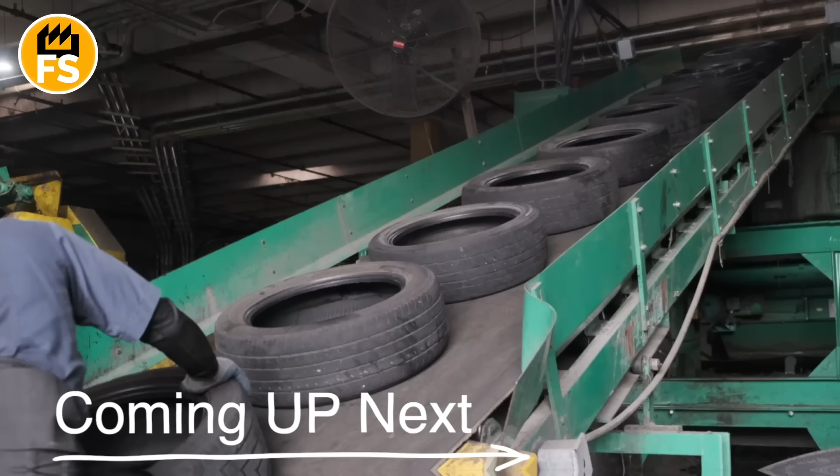Houston, Texas, high noon. The sun here doesn't just shine, it presses down on your shoulders like a heavy, hot blanket. The air above the scorching asphalt shimmers with heat waves, and your lungs fill with a thick, distinct smell, a mix of heated rubber, dry prairie, and diesel fuel.

I'm standing at the gates of the Genan plant, the world's largest tire recycling facility, and I can feel the soles of my boots starting to soften on the blistering Texas ground. Today, I'm not just a tourist. I'm a witness to a massive technological alchemical process, where what the world considers waste that won't decompose gets transformed into energy, and the very foundation of the highways we drive on.

Houston didn't just greet me with sunshine. It slammed me with a wall of sticky heat that folks down here in Texas call the devil's breath. But the second I stepped through the entrance to Genan's facility, the sounds of the city, distant highway hum and rustling wind, instantly shifted into something far harsher.

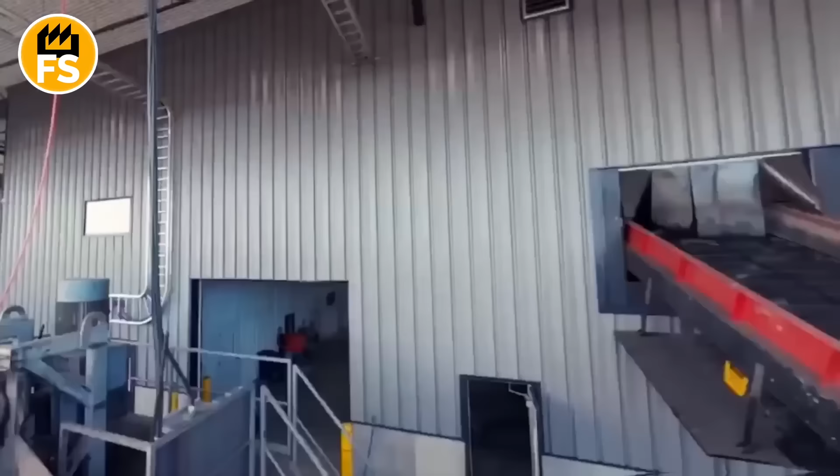Industrial chaos. But chaos that's perfectly ordered, rhythmic, almost primal. The first thing that hits you isn't the sound, it's the vibration. You don't just hear it, it rattles your chest like a low bass line at a rock concert. That's the giant motors firing up the heart of the plant.

And spread out before me are the real black Himalayas. Thousands, maybe tens of thousands of used tires stacked into neat but staggering mountains. Everything's here. Thin wheels from compacts that only ever touched smooth asphalt, all the way up to massive donuts from mining dump trucks, treads tall as a person. They all came here to die, so they could be born again.

The smell here is something else. It's not just the stench of rubber. It's a complex cocktail of heated polymer, traces of road tar baked into the treads, and hot metal. The Texas sun mercilessly scorches these black surfaces, and the heat radiating off them makes you feel like you're standing next to an open oven.

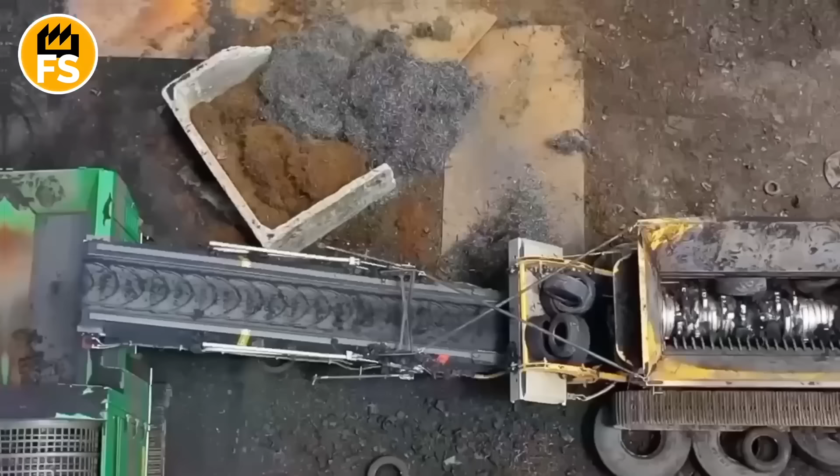The air between the mountains has solidified. It's thick and oily. I watch as another truck rolls up. The hydraulics groan as the bed lifts, and hundreds of tires tumble down with a muffled rumble. Thump, thump, thump, cascading to the foot of the black mountain.

This sound of rubber hitting rubber layers over that same endless vibration from the plant's engines. It creates this uncanny sensation of being inside a living organism. The plant breathes with this rhythm. It's hungry, and these mountains are its food.

The vibration intensifies when the feed conveyors kick on. You see these massive manipulators, like the claws of prehistoric monsters, tearing into the piles, snatching their prey. In this place, on the edge between old junk and raw material, you feel tiny.

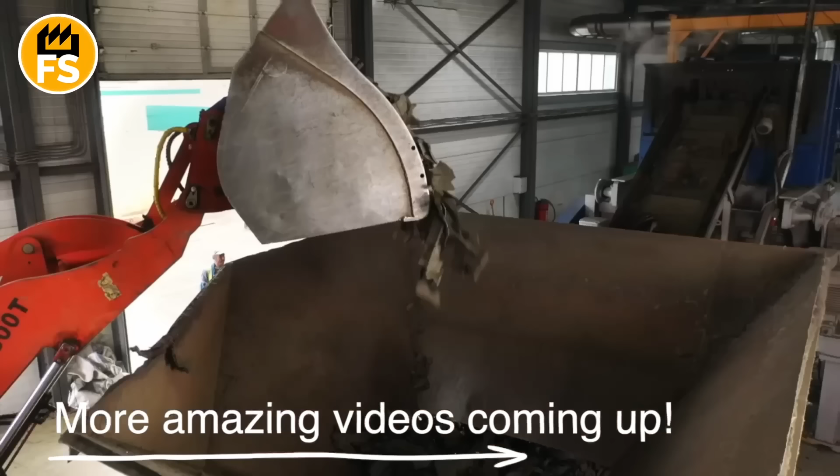We're following the conveyor belt that leads straight into the heart of the main floor. Here, that vibration I mentioned earlier transforms into physical force, pounding against your eardrums. We approach it, the primary shredder. If those mountains of tires were a graveyard, then this machine is the industrial meat grinder that knows no mercy.

The first thing that hits you is the contrast between speed and power. You'd expect the shredder to spin at breakneck speed, flinging chunks of rubber in every direction like a blender. But no, the shredder's shafts move slowly, almost lazily. But within that slowness lies colossal torque, force capable of crushing stone.

It's a deliberately engineered method. Low rotational speed prevents the rubber from overheating, keeping it from melting and sticking to the blades, which would turn the machine into a gummy trap.

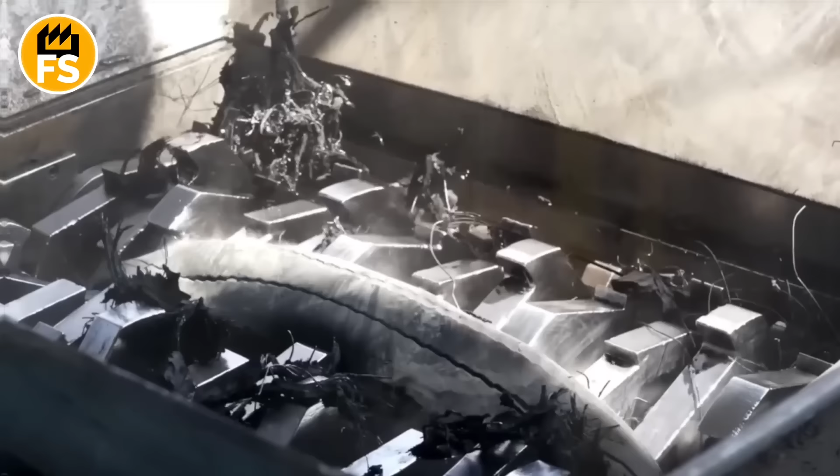When the next tire, say, a massive wheel from a Texas pickup, hits the rollers, something happens that makes you flinch. The tire tries to hold its shape. Its steel belt, that same skeleton that carried tons of weight on the road, puts up one last fight. But hardened blades made from special alloy dig into the tread like the teeth of a prehistoric predator.

One second, and you hear that distinctive crunch as the steel wires inside the rubber snap under hundreds of tons of pressure. In that moment, bright, angry showers of sparks fly out of the shredder's jaws. It's the friction of the steel belt against the blades, creating miniature lightning bolts inside the machine's dark belly.

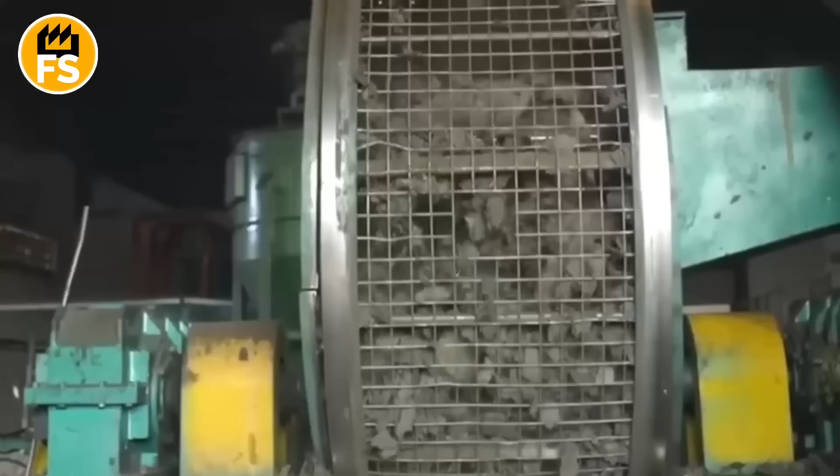The heat here becomes almost unbearable. If it was just hot outside in Houston, near the shredder, the air heats up to a temperature where the sweat on your forehead instantly turns sticky with rubber dust. You can smell the frictional heat, sharp, metallic, with notes of burnt sulfur. It's the smell of matter being physically destroyed.

Dust is everywhere here. It's not just floating in the air, it's dancing in the beams of industrial lights, settling on every surface like black velvet. These are tiny rubber particles released during the tearing process. You can see chunks falling from beneath the rollers onto the exit conveyor.

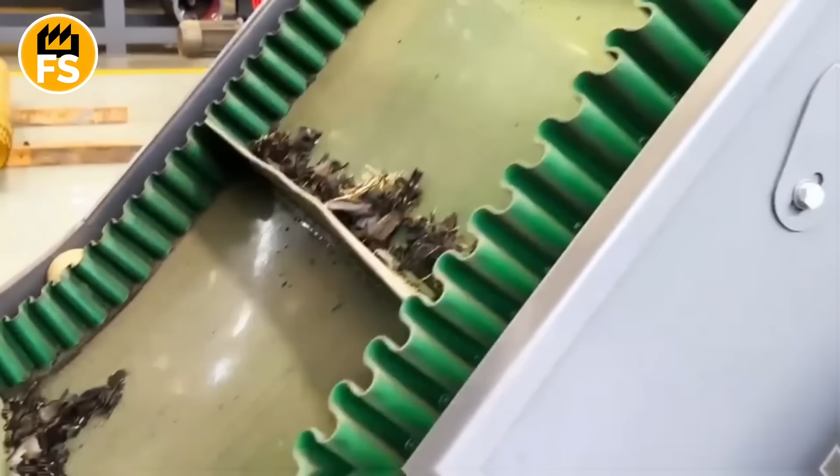This isn't a tire anymore. These are shapeless, torn scraps of rubber, roughly the size of an adult man's palm. Mangled strands of steel wire stick out from them, those same cord fangs that magnets will pull out in the next stage. The chunks of shredded rubber that just passed through the shredder's jaws move along on the conveyor belt. They look terrible, torn, dirty, hot, with those same mangled steel wire threads, cord fangs, sticking out from every black edge. Right now, one of the most cinematic stages at the Genan plant begins.

We're approaching the magnetic separation zone. Above the conveyor, where chunks of tires race by in an endless stream, massive blocks hang suspended, overhead electromagnetic separators. They hang low, almost touching the black flow, humming with voltage. What happens on the belt resembles an uprising of the dead.

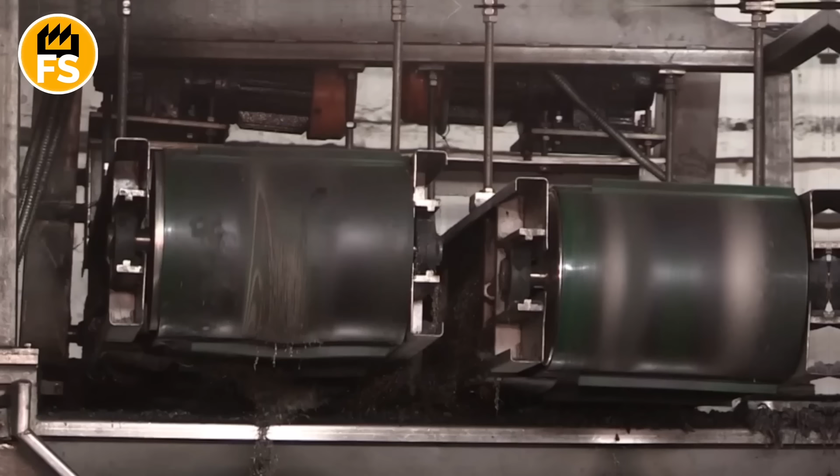When a ragged chunk of rubber enters the magnet's zone, the steel threads inside it react instantly. You see it with your own eyes. Metal wire that a second ago was part of a solid framework suddenly comes alive. With savage force, it tears free from its rubber prison, dragging the entire chunk with it, or simply slipping out like a knife through butter.

Metal literally shoots upward, defying gravity. It looks like strange, aggressive magic. Thousands of steel needles and twisted wires slam into the magnetic belt with a loud crash, spinning perpendicular to the main conveyor. This is that endless clacking, the sound of thousands of metal fragments hammering into the separator's steel armor.

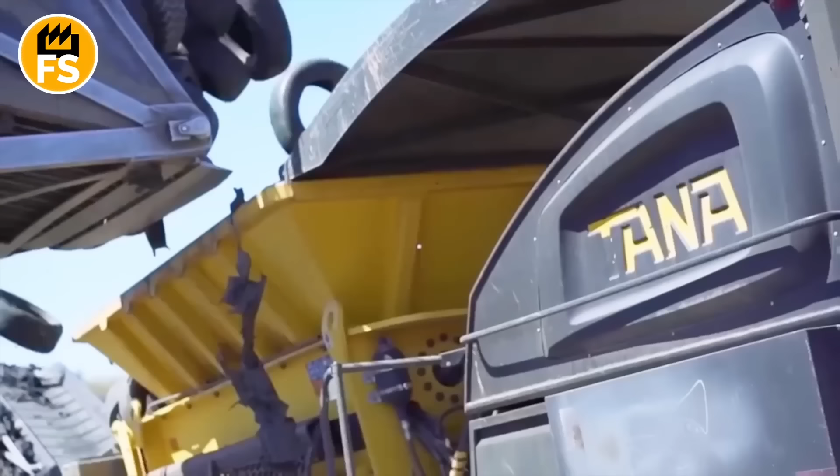The heat in this zone is unique. The magnets consume a massive amount of electricity and generate heat themselves, mixing with the warmth from freshly cut rubber. You're standing in a cloud of a specific smell, a blend of ozone, which always accompanies powerful electromagnets, and warm, raw metal. It's the smell of a forge, but without fire.

Look to the left of the main conveyor. Another mountain is growing there, a mountain of pure steel. The magnetic belt carries the captured metal beyond the rubber stream, and where the magnetic field vanishes, dumps it into a separate hopper. You're looking at springs coiled into spirals, long sharp needles, tiny metal chips. Everything gleams under the factory lights with a cold, bluish glow, contrasting sharply against the matte black of the rubber.

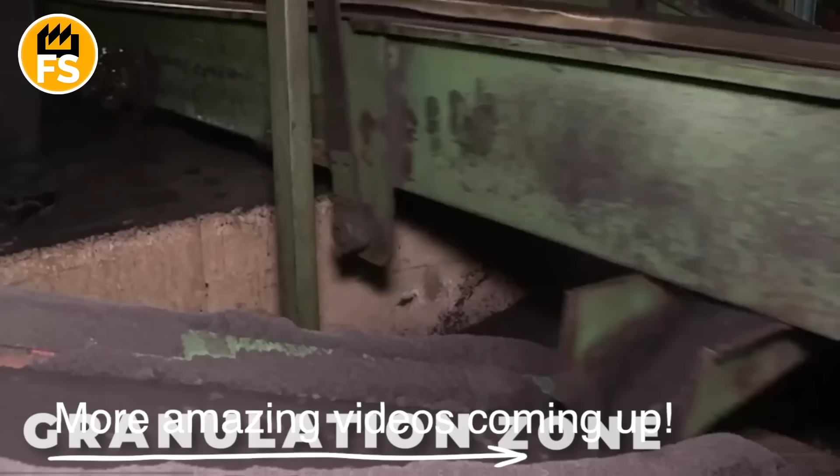Stripped of its steel skeleton, the rubber moves forward into the darkest and most airtight section of the plant. Now that the metal's gone, the rubber chunks look surprisingly light, but that's just an illusion before the final battle. We're entering the secondary granulation zone. High-speed granulators transform the torn pieces into perfect rubber crumb.

The air here is thick with black snow, fine dust swirling through beams of light. Each granule passes through a system of vibrating screens, where they're sorted by size down to a fraction of an inch. But the real climax lies ahead, inside the sealed steel pyrolysis reactors.

We approach the long, insulation-wrapped cylinders. This is the zone of quiet energy. There's no open flame here, but inside, hellish heat reigns, 850 degrees Fahrenheit. The key secret? Total absence of oxygen. The rubber doesn't burn, it distills.

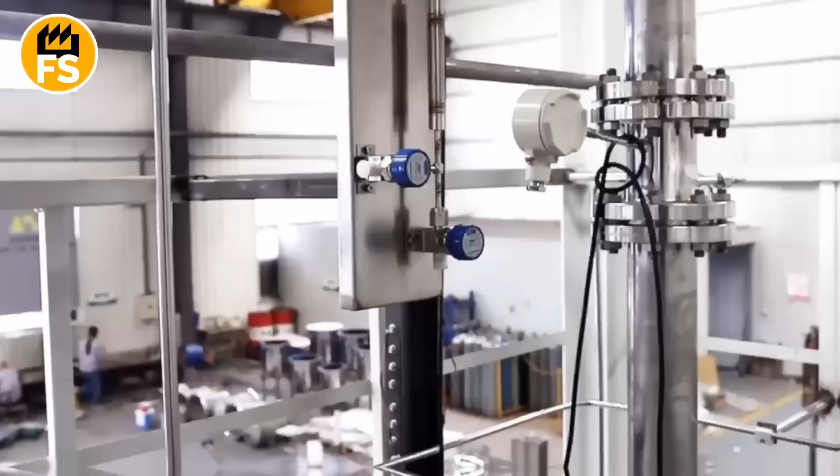There's a metal so rare that humanity mines less of it in an entire year than gold in a single day. A metal that costs $2,000 to $4,000 per pound. A metal you've never heard of, but one that's keeping the plane you flew on for vacation from falling out of the sky right now. This is rhenium, the rarest stable element in Earth's crust, a silvery white metal that doesn't exist as its own ore and is only extracted as a byproduct. Without it, we wouldn't have modern jet engines, and aviation would be stuck at mid-last century levels. Let's dive into the world of the planet's most exclusive mineral, where every gram is worth its weight in gold, and applications are measured not in tons, but in pounds.

Let's start with the scale of rarity. Rhenium makes up about 7 ten-thousandths of a part per million in Earth's crust. For comparison, gold is 4 thousandths, platinum is 5 thousandths. But gold and platinum can be found as nuggets or concentrated ores. Rhenium never happens that way. It's scattered as microscopic impurities in other ores, mostly molybdenum and copper. The concentration is so low that even talking about rhenium ore isn't really accurate. It's always ore of something else that just happens to contain rhenium.

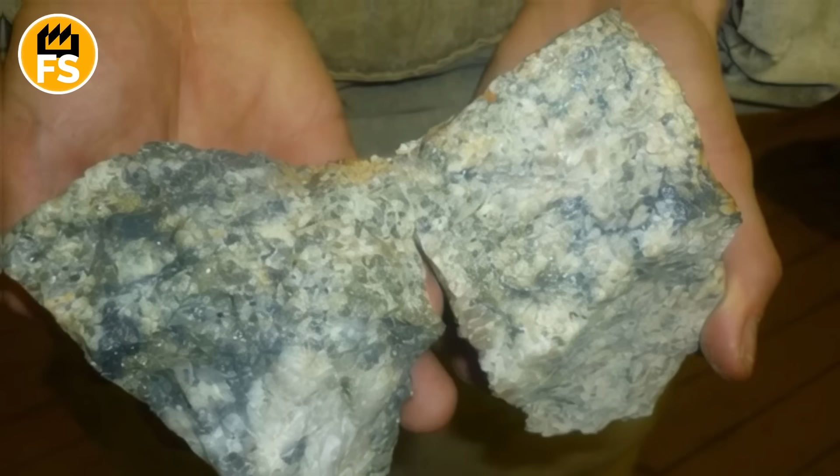Rhenium itself looks like a silvery white metal with a slight grayish tint. But most people have never seen pure rhenium. Even in industry, it's often used as alloys or powder. In nature, rhenium occurs in only one mineral, dzhezkazganite, which is so rare it exists in literally just a few places on the planet and has no commercial value.

All industrial rhenium is obtained as a byproduct of processing molybdenum concentrates, which themselves are a byproduct of copper mining. It's a byproduct of a byproduct.

Imagine the scale. To get 1 kilogram of rhenium, you need to process about 200,000 tons of copper ore. 200,000 tons of rock for a kilogram of metal. It's like looking for a needle, not in a haystack, but in a field planted with hay.

The main sources of rhenium are molybdenum mines in Chile, the USA, Kazakhstan, and Armenia. Chile dominates, about 50% of global production.

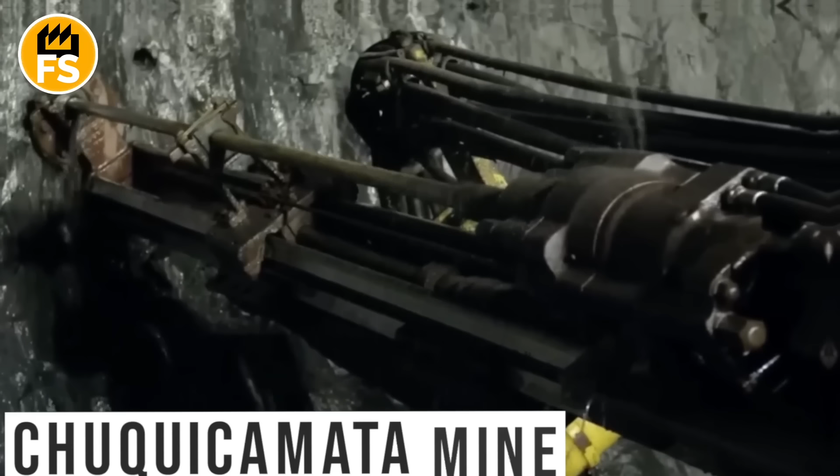The Chuquicamata mine in the Atacama Desert is one of the largest open-pit mines on the planet, where copper and molybdenum are extracted, with rhenium obtained as a side benefit. The pit is so massive it's visible from space, about 2.8 miles long, 1.9 miles wide, and over half a mile deep.

The rhenium extraction process is complex and multi-staged. First, they mine copper ore and concentrate it through flotation, producing copper concentrate. This concentrate contains molybdenum, which is also concentrated and separated. Molybdenum concentrate is molybdenum sulfide with microscopic traces of rhenium, typically from 0.05 to 0.2%. Still with me? Let's keep going.

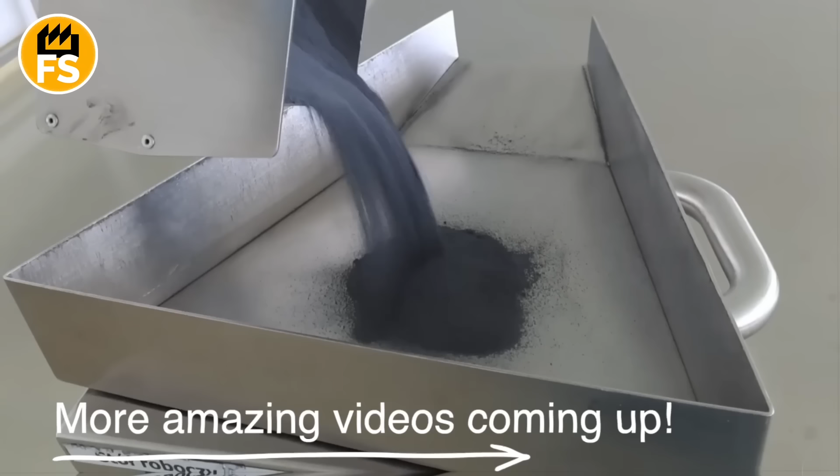The molybdenum concentrate gets roasted in special furnaces at temperatures around 2000 degrees Fahrenheit or higher in air. Molybdenum oxidizes to molybdenum trioxide, which can then be reduced to metal. But rhenium behaves differently. It oxidizes to rhenium heptoxide, which at this temperature evaporates and escapes with the gases.

The solution is purified from impurities of molybdenum, copper, lead, and other metals through multi-stage chemical treatment. Then, rhenium is precipitated as a white crystalline powder. This is the most common form of rhenium feedstock for further processing.

To obtain metallic rhenium, the powder is heated in a stream of hydrogen. Hydrogen reduces the rhenium oxide to metal. The result is rhenium powder, which can then be sintered, melted, or used directly.

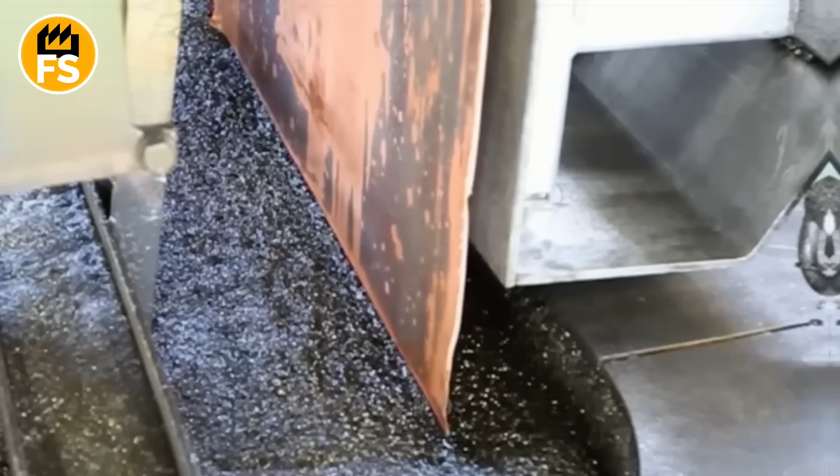Every year, humanity produces around 50 tons of rhenium. For comparison, we mine roughly 3,000 tons of gold annually and 20 million tons of copper. Rhenium is so rare that global stockpiles at any given moment are measured in hundreds of tons, not thousands or millions. So here's the question: why bother mining something this scarce?

The answer: jet engines. Close to 80% of all rhenium goes into the aviation industry to manufacture superalloys used for making turbine blades. A jet engine turbine blade operates in absolute hell. Gas temperatures hit 3,000 degrees. Pressure is massive. The blade spins at tens of thousands of revolutions per minute, experiencing loads of hundreds of tons per square inch.

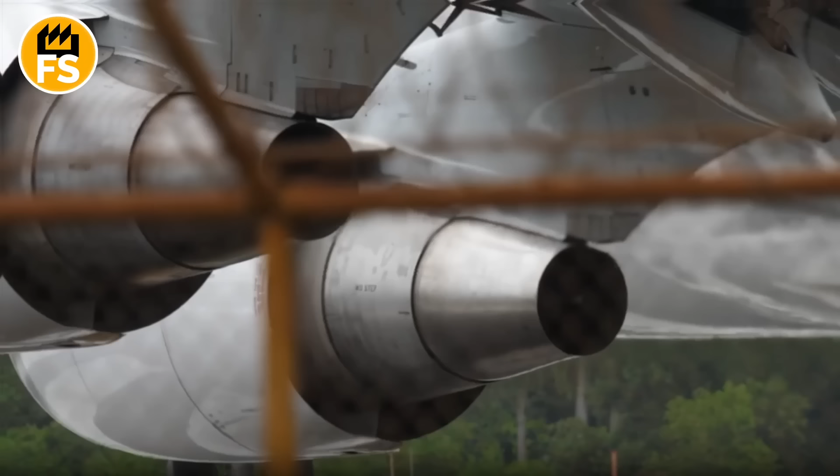Corrosive environment with sulfur impurities from aviation fuel. And all of this for years of continuous operation with zero margin for error. If a blade cracks mid-flight, the engine disintegrates, the plane goes down. Nickel superalloys, the primary material for turbine blades, contain nickel, chromium, cobalt, tungsten, molybdenum, aluminum, and titanium.

But even these complex alloys couldn't withstand temperatures over several thousand degrees for extended periods, until they added rhenium. Rhenium does something remarkable. It dissolves into the nickel matrix of the superalloy and prevents defects from moving through the crystal structure at high temperatures. This is called creep, the gradual deformation of metal under load at temperature. All metals creep, but rhenium slows this process down by several times.

Adding just 3% rhenium to a nickel superalloy increases the operating temperature by about 54 degrees Fahrenheit. Doesn't sound like much, but in jet engines, every 18 degrees of additional temperature gives roughly 1% increase in efficiency. And efficiency means fuel consumption, flight range, airline economics.

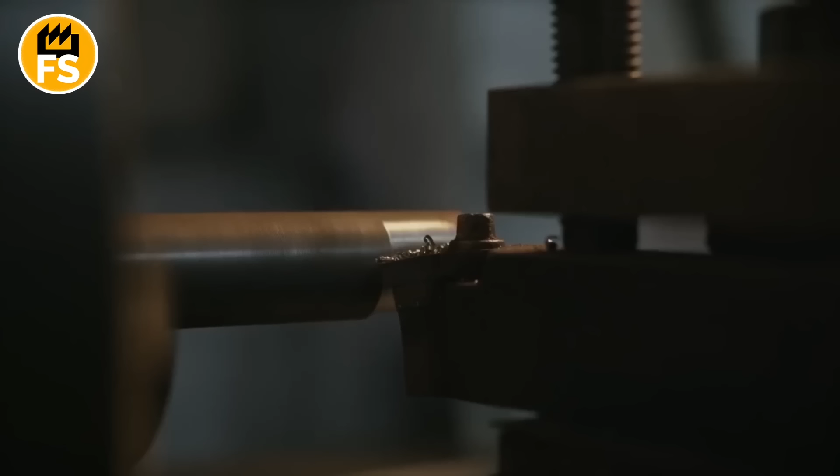Modern superalloys contain up to 6% rhenium. These are the so-called second and third generation superalloys. A single turbine blade can contain 5 to 20 grams of rhenium. One Boeing 787 or Airbus A350 engine contains roughly 13 pounds of rhenium in its blades. 13 pounds of metal worth $30,000 to $60,000 in a single engine. And a plane has 2 engines.

Thousands of jet engines are manufactured every year: passenger, cargo, military. Nearly all the rhenium mined in the world goes right there. Because of its rarity and high price, the industry is desperately trying to cut rhenium consumption. New generations of superalloys are being developed with lower content or using ruthenium, an element from the same group that could theoretically replace rhenium. But ruthenium is even rarer and more expensive, so for now, it's just research.

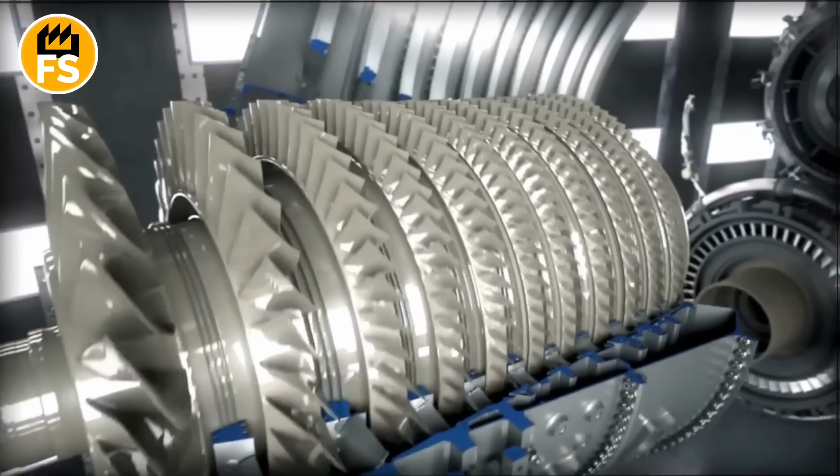Single crystal blade technology lets manufacturers use rhenium more efficiently. Instead of a polycrystalline structure, the blade is grown as one massive crystal with no grain boundaries, the weak spots. This allows them to reduce rhenium content while maintaining performance. But the process is complex and expensive. Each blade is grown individually in specialized furnaces with extremely slow, controlled cooling.

Recycling rhenium from spent blades is critically important. After thousands of hours of operation, blades wear out and get replaced. Old blades aren't thrown away. They're melted down, and rhenium and other valuable metals are extracted and used again. About 30% of rhenium comes from secondary recycling, more than most other metals, simply because of its enormous value.

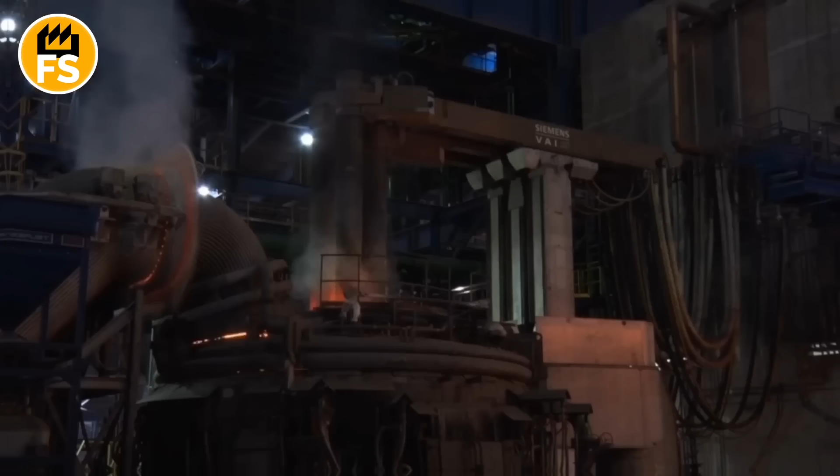The remaining 20% of rhenium goes into other applications: catalysts in petroleum refining, platinum rhenium catalysts for reforming that boost gasoline octane ratings, filaments for mass spectrometers and electron microscopes, and anode materials for X-ray tubes.

Rhenium's strategic importance is massive. Countries without access to rhenium can't manufacture modern jet engines. This isn't just about civilian aviation, it's military too: fighters, bombers, cruise missiles. The US, with its own molybdenum mines, secures its rhenium supply.

Europe and Asia depend on imports, mostly from Chile and the US. China is aggressively ramping up rhenium production, developing their own molybdenum deposits. They get it: without rhenium, you can't build a competitive aviation industry.

Here's the thing: rhenium was one of the last stable elements ever discovered. German chemists found it back in 1925 while analyzing platinum ore with spectral analysis. They named it after the Rhine, Rhenus in Latin. Before that, Mendeleev had predicted element number 75 would exist, but nobody could find it. It was just too incredibly rare.

Right now, you're holding the result of an African tragedy in your hands. Inside your smartphone, laptop, gaming console are tiny components made from a metal mined in the jungles of Congo, where actual wars are fought over it. This is coltan, a dull black rock that looks like an ordinary river stone but costs thousands of dollars per pound, and without which no modern electronics would work.

Millions of people have been killed for this rock. Its extraction finances armed groups, destroys gorilla reserves, and turns people into slaves. But without it, your phone wouldn't exist. Let's peer into the dark world of the most controversial mineral of the digital age, where every like and every post carries the price of a human life.

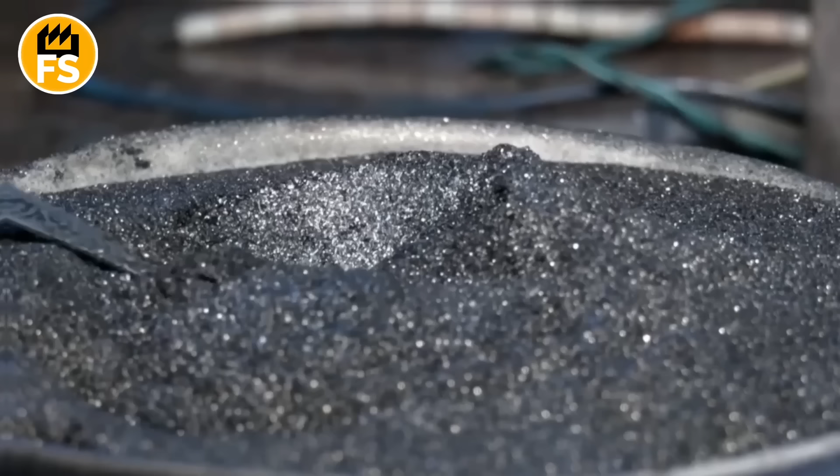First, the terminology. Coltan isn't an official mineral name, it's short for columbite-tantalite. It's an ore containing two metals, niobium, which used to be called columbium, and tantalum. It's tantalum that makes coltan so valuable. It's a silvery gray metal with a unique combination of properties: it doesn't corrode at all, withstands extreme temperatures, has high capacitance, and barely conducts electricity because of a thin oxide film on its surface. That last property revolutionized electronics.

Tantalum is used to make capacitors, components that store and discharge electrical charge. Tantalum capacitors are microscopic, the size of a grain of sand, but they have enormous capacitance. They're stable, reliable, work for years without degrading. Every smartphone contains 40 to 50 tantalum capacitors, a laptop up to 100, gaming consoles, cameras, even electric toothbrushes. Tantalum's everywhere.

Coltan looks like black or dark gray rock with a metallic shine. Heavy, density around 8 grams per cubic centimeter, almost like lead. If you pick up coltan, you feel it's unusually heavy for its size. It occurs as coarse crystals or grainy masses in granite formations. Nothing special to look at, just a rock. But you can get anywhere from $100 to $400 per kilogram, depending on tantalum concentration.

The main problem with coltan is geography. About 60% of the world's reserves are in one place: the eastern provinces of the Democratic Republic of Congo, especially Kivu and Ituri. This is one of the most dangerous regions on the planet. For decades, there's been a civil war involving dozens of armed groups that control the mines and use the profits to buy weapons.

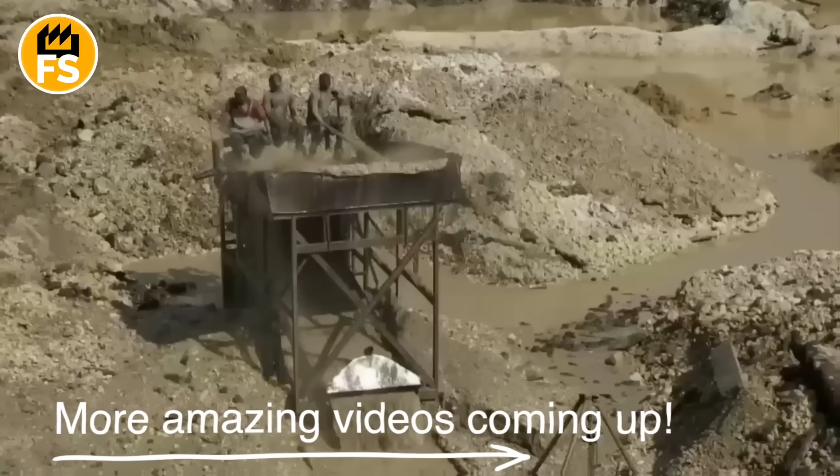Tens of thousands of people dropped everything and headed into the jungle to dig for coltan. Armed groups seized control of the deposits. Murders, rapes, forced labor began. Kahuzi-Biega National Park, home to mountain gorillas, was overrun by miners. Animals were killed for meat, or simply because they got in the way. The gorilla population plummeted by 90% in just a few years.

The UN published a report confirming that coltan sales were financing a conflict that had claimed millions of lives, the bloodiest war since World War II. Armed groups controlled the mines, forcing local populations to work for free or for pennies, smuggling coltan through Rwanda and Uganda, selling it to middlemen who shipped it to China and Europe for processing.

Coltan extraction in Congo is mostly artisanal, meaning small scale, no machinery. Miners work in rivers and streams, washing ore in pans like gold prospectors. Coltan's heavier than regular sand and pebbles, so it settles at the bottom of the pan. Or they dig pits in the forest, sometimes 30 feet deep, with no reinforcement. Cave-ins kill people regularly, but nobody keeps track.

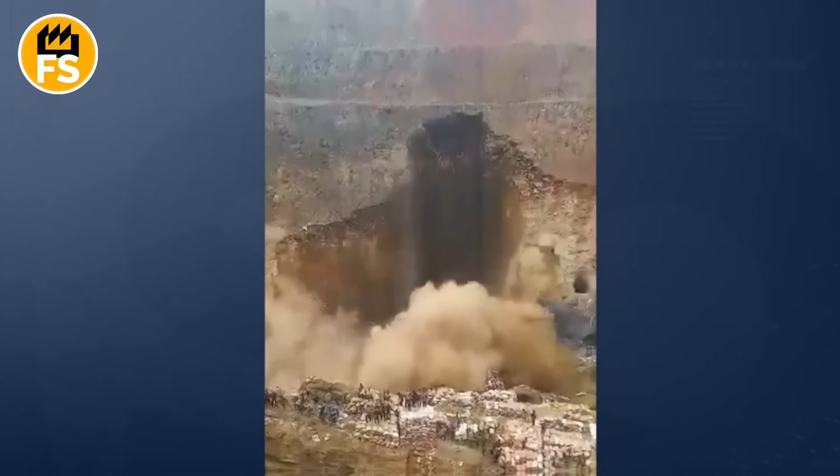The working conditions are horrific. People stand waist-deep in murky water all day long, washing tons of rock for just a few pounds of coltan. They make $1 to $5 a day, more than farming, but still poverty. No safety, no rights. Kids work right alongside adults. Women are forced into labor, or worse.

Coltan gets collected, dried, and sold to local traders. They haul it to regional centers where Chinese and other foreign companies have warehouses. There, they weigh the coltan, test the tantalum concentration with handheld analyzers, pay cash. Then they ship it out by plane or truck through neighboring countries, Rwanda, Uganda, Burundi, to mask where it came from.

Rwanda officially exports hundreds of tons of coltan every year, even though it has almost no deposits on its territory. It's obvious what's happening. It's a transit point for Congolese coltan. The international community knows, but stopping the flow is hard. Borders in the region are porous, corruption thrives, tracing the origin of a specific shipment is nearly impossible.

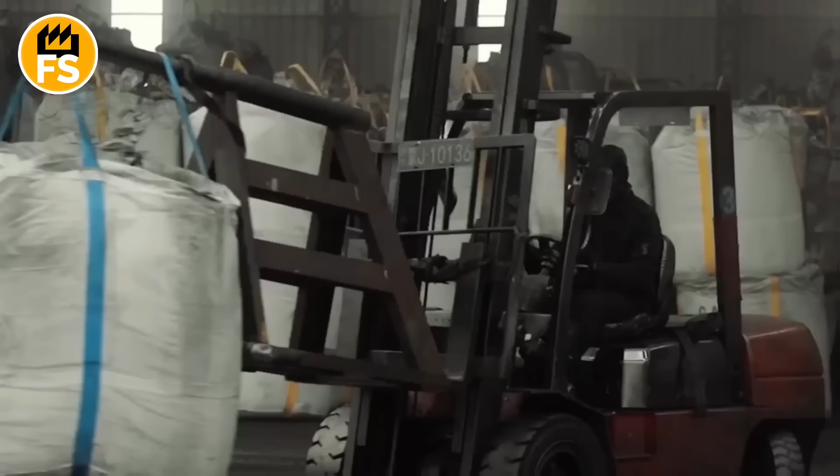The coltan gets shipped to China, where most of the processing facilities are concentrated. There, it's melted in electric arc furnaces at temperatures exceeding 3,600 degrees Fahrenheit. What comes out is slag containing tantalum and niobium oxides. This slag gets treated with hydrofluoric acid, producing fluorides, which are then reduced to metals through complex chemical processes.

Tantalum is incredibly refractory. Its melting point is around 3,000 degrees Celsius, third highest after tungsten and rhenium among all elements. That makes processing energy intensive and complex. Extracted tantalum is converted into powder, which is then pressed, sintered, and turned into anode foils for capacitors just a few micrometers thick. A tantalum capacitor works simply.

Thin foil is coated with an even thinner film of tantalum oxide, which acts as the dielectric. Thanks to the microscopic thickness of this film and the massive surface area of the porous structure, you get enormous capacitance in a microscopic volume. This allows electronics to be compact. Without tantalum capacitors, smartphones would be the size of bricks.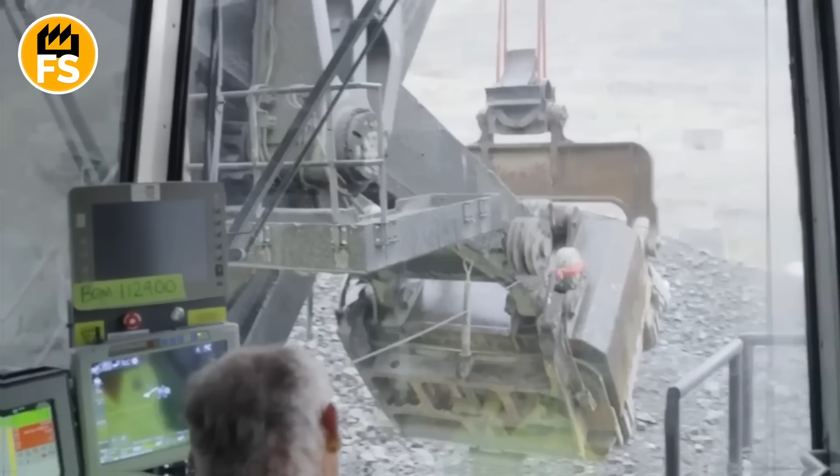Legal coltan mining exists. Australia, Brazil, Canada have deposits and extract coltan using industrial methods that comply with environmental and labor standards. But the cost is higher because you have to pay decent wages, maintain safety standards, and rehabilitate the land. Congolese coltan, extracted through what's essentially slave labor, is cheaper, so demand for it persists.

There are also synthetic alternatives. Ceramic capacitors based on barium titanate can replace tantalum capacitors in some applications. They're cheaper and aren't linked to conflict. But for the most compact devices with high reliability requirements, tantalum remains irreplaceable. Military electronics, medical implants, aerospace equipment, they only use tantalum.

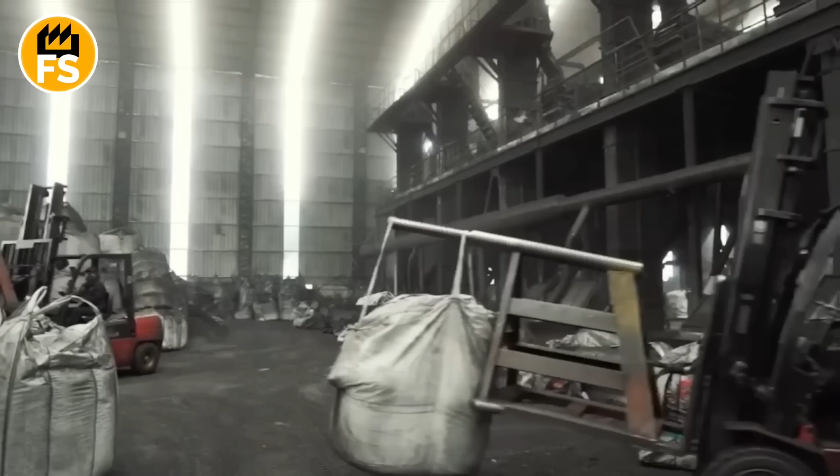Tantalum demand holds steady, around 2,000 tons a year. That doesn't sound like much compared to the millions of tons of copper or steel, but given its rarity and concentration in one region, even that amount creates enormous pressure. Every new smartphone, every data center, every 5G cell tower requires tantalum capacitors.

Tantalum prices fluctuate between $150 and $300 per kilogram for the metal, or the equivalent for ore depending on concentration. For comparison, gold runs about $60,000 per kilogram. Tantalum's cheaper, but you need way more of it. And extraction is concentrated in a conflict zone, making it strategically critical.

The environmental fallout is horrific too. The Congo jungle, one of the planet's largest tropical rainforests after the Amazon, is home to unique species. But artisanal mining is wrecking ecosystems. Forests get chopped down for mines and miner camps. Rivers become polluted with washed-out rock that kills fish and aquatic life. Poaching thrives. Miners hunt wild animals for food.

There are attempts to recycle tantalum from electronic waste. Old cell phones, computers, devices contain tantalum capacitors. Technologies exist to extract and recycle them, but economically it's tough. You have to collect massive quantities of old devices, disassemble them, isolate tiny components, remelt everything. Right now, only 5 to 10% of tantalum comes from recycling.

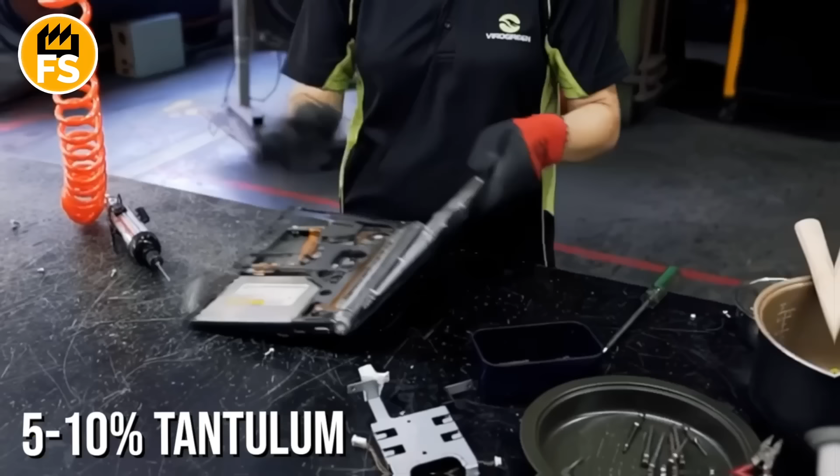Some activists are calling for a boycott of electronics, or at least mindful consumption: don't swap your smartphone every year, repair instead of tossing it, buy used. But here's the reality—most people don't even know about coltan and the problems tied to it. Manufacturers don't advertise the dark side of their shiny gadgets.

There's hope in technological progress. New types of capacitors are being developed that could eventually replace tantalum ones. Graphene supercapacitors promise even higher capacity in smaller sizes, but mass production is years, maybe decades, away. For now, tantalum remains a critical element of the digital age.

The irony? Congo is one of the poorest countries in the world, despite its incredible wealth of natural resources—cobalt, coltan, copper, gold, diamonds, all buried in Congo's soil. But corruption, conflict, and exploitation by foreign companies mean that wealth never reaches the people. It's a classic resource curse, when natural resources become not a blessing, but the cause of endless wars and suffering.

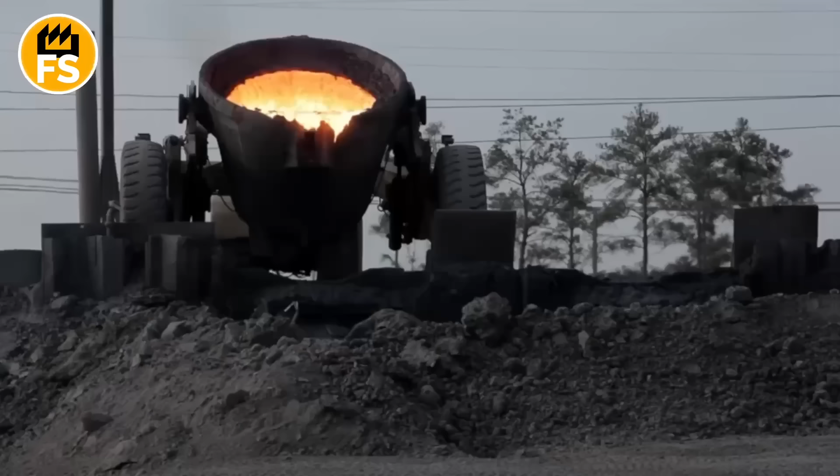There's a metal out there almost nobody ever sees, but it's what turns steel into armor. How is it that just a few grams of vanadium per ton can boost a structure's strength by tens of percent and literally lighten the weight of the world? Where does this element hide if it's almost never found pure in nature? And why is it often extracted not from ore, but from dark slag that others consider waste?

Today, you'll witness vanadium's journey: hellish furnaces, blinding molten metal, fire-colored powder, and the birth of ferrovanadium that transforms steel in an instant. And at the end, I'll reveal why control over vanadium is no longer just metallurgy, it's geopolitics.

Vanadium holds a special place among industrial metals, though for most people it remains nearly invisible. It's rarely seen in pure form, it's not used for jewelry, and it's barely associated with everyday life. Yet vanadium became one of the key factors in the creation of armored steels and modern high-strength structures, without which bridges, skyscrapers, automobiles, and heavy machinery would be impossible to imagine.

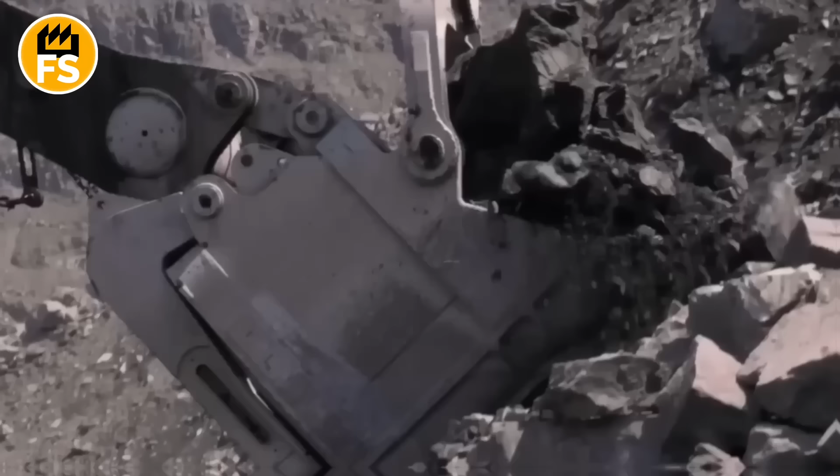The history of vanadium as a metal begins in the 19th century, but it gained real industrial significance much later, when metallurgists understood how even tiny amounts of this element could radically transform steel's properties. In nature, vanadium almost never occurs in its free state. Most of the time, it's found in complex minerals and ores, particularly vanadium-bearing titanomagnetites, and also in magnetite, where it replaces some of the iron atoms in the crystal lattice.

The major vanadium ore deposits are concentrated in China, South Africa, Russia, and a few other countries. Mining is typically done through open pit or underground methods, depending on how deep the ore bodies lie. Magnetite ore with vanadium impurities goes through crushing and enrichment after extraction, where they separate out a concentrate with high iron and vanadium content. At this stage, the material isn't split into individual metals yet—it's a complex mixture of oxides.

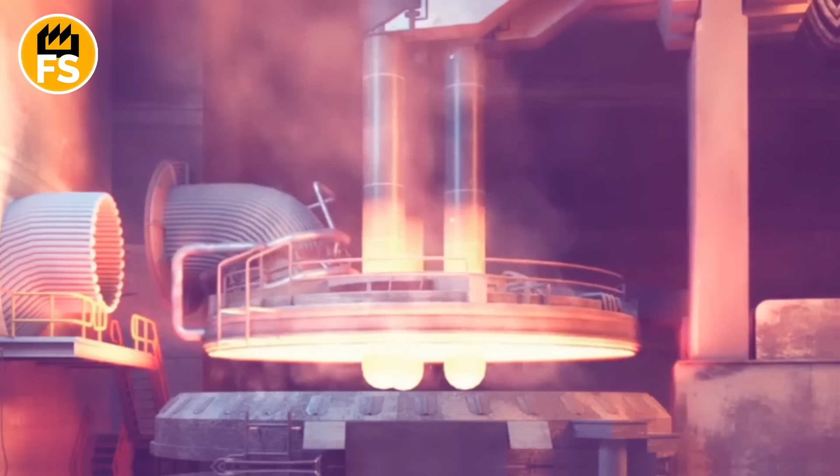Vanadium's next stop, where metallurgy becomes a true industrial spectacle. Melting magnetite concentrate happens in blast furnaces or electric arc furnaces running at temperatures over 2,700 degrees Fahrenheit. Inside the furnace, a mass of ore, coke, and fluxes slowly descends, passing through zones of different heat where solid chunks first sinter together, then transition into liquid.

Molten iron collects at the bottom of the furnace, while lighter components, including vanadium oxides, concentrate in the upper slag layer. When the moment of release arrives, the furnace opens, and glowing streams pour out. Liquid slag glows with a blinding yellow-orange light, flows through channels, and throws up clouds of steam when it hits air or cooling surfaces.

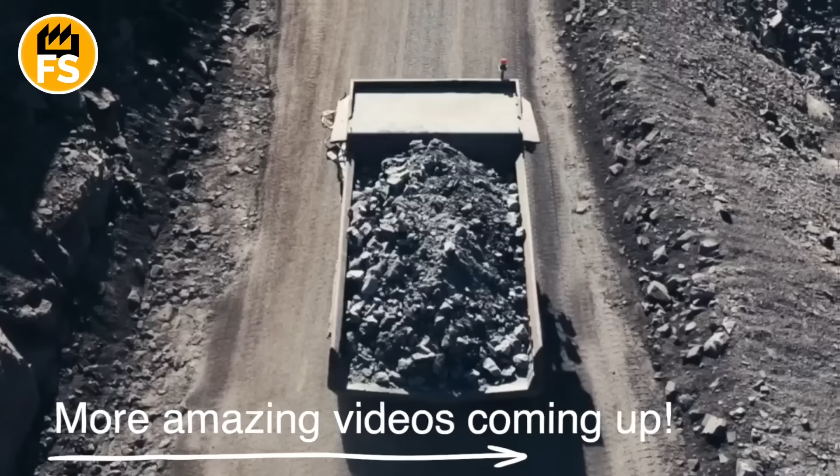Right there in that seemingly spent mass lies the core treasure for vanadium production. After cooling, the slag transforms into solid, brittle chunks of dark material, deliberately collected and hauled away for further processing. Next up, crushing: big pieces of slag pass through crushers and mills, getting ground into granular material or powder. The process hums with machinery, vibrations, and clouds of fine dust, immediately sucked away by filtration systems.

The pulverized slag is prepped for chemical treatment, where vanadium needs to be extracted from an incredibly stable oxide matrix. Then the material enters reaction tanks filled with aqueous solutions of alkalis or salts.

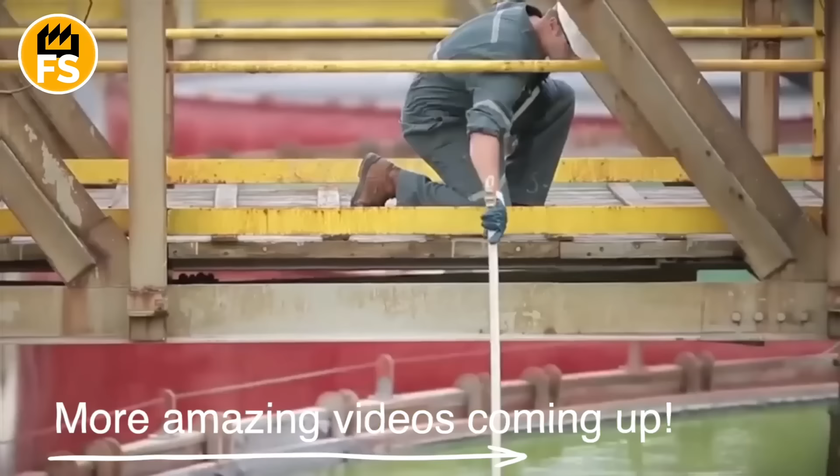Under controlled temperature and constant stirring, leaching takes place. Vanadium compounds gradually transition into solution, shifting its color from pale yellow to rich orange or reddish. These visual changes directly indicate metal concentration and allow operators to monitor the process in real time.

The resulting solution undergoes several purification stages. It's filtered, removing insoluble impurities, followed by precipitation, adding reagents that selectively bind vanadium. Inside the reaction vessels, a fine precipitate appears, gradually compacting and separating from the liquid.

After washing and drying, this material becomes vanadium pentoxide, a bright powdery substance with a distinctive yellow-orange hue. From this moment on, vanadium stops being a hidden component in slag and becomes an independent industrial raw material. Vanadium pentoxide is then used to produce ferrovanadium, or is reduced to its metallic state.

This entire sequence, from blinding molten metal to fine powder, vividly demonstrates how, deep within metallurgical processes, a material is born that defines the strength and reliability of modern steel.

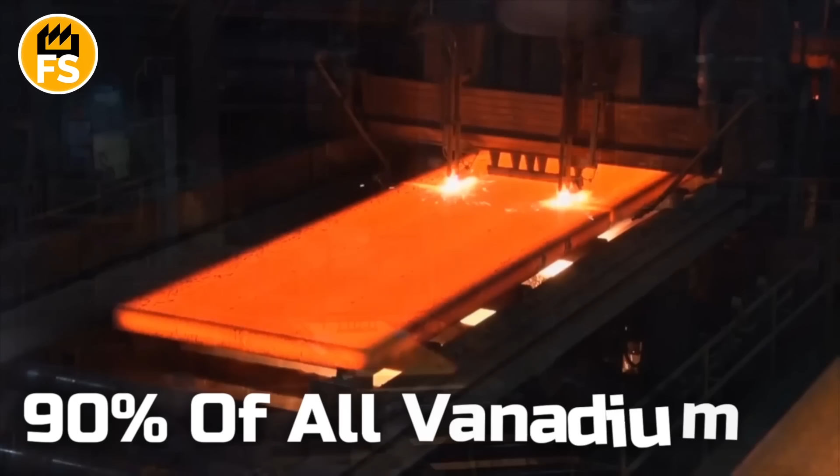China produces 70,000 tons of vanadium annually, far exceeding the output of other countries and making it the global leader in both production and consumption of this metal. In terms of consumption, 90% of all vanadium goes into metallurgy, especially into high-strength microalloyed steels, where small additions of vanadium significantly increase mechanical strength, impact toughness, and fatigue resistance of structures.

Ferrovanadium production is the critical link between chemical vanadium enrichment and the steel industry. It's in this alloy form that vanadium is most conveniently introduced into steel, precisely dosing its content and ensuring uniform distribution throughout the melt. The primary raw material for the process is vanadium pentoxide, obtained after processing slags or ores, along with metallic iron or iron-containing alloys.

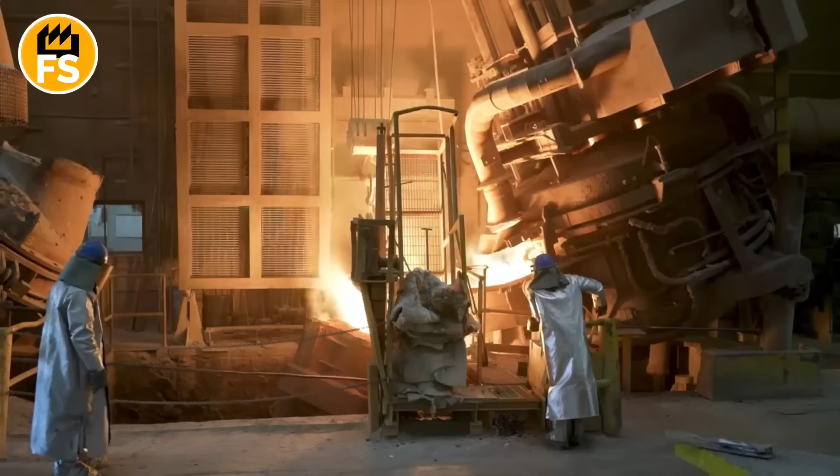The process begins with charge preparation. Vanadium pentoxide is mixed with reducing agents, typically aluminum or silicon, and iron in strictly defined proportions. Next, the mixture is loaded into crucibles or electric furnaces, where conditions are created to reduce vanadium from its oxide state. Temperatures in the reaction zone reach over 3,600 degrees Fahrenheit, and it's at this moment that one of the most intense stages in the entire production line occurs.

During aluminothermic or silicothermic reduction, the reaction proceeds extremely rapidly and releases a significant amount of heat. Vanadium oxides surrender their oxygen to the reducing agent, while pure vanadium transitions into a molten state and immediately dissolves in the iron. The result is liquid ferrovanadium with a specified metal content, typically ranging from 40 to 80% vanadium, depending on customer requirements.

After the reaction completes, the melt is held to stabilize its composition, then poured into molds. As it cools, the ferrovanadium crystallizes, forming solid ingots or granules with a characteristic dark gray surface. The material is then crushed to a convenient size, packaged, and shipped to steel mills.

The main value of ferrovanadium lies in its predictable behavior in molten steel. It dissolves quickly, is barely lost during melting, and allows precise control over microalloying. That's exactly why ferrovanadium became the standard form of vanadium supply for producing high-strength steels, from building structures to automotive components and armored products. The key feature of vanadium is that it works in microdoses.

To get a noticeable effect, just tenths or even hundredths of a percent are enough. This means that for 1 ton of steel, only grams of vanadium are used, but those grams can boost yield strength, toughness, and durability by tens of percent. At the scale of millions of tons of steel, this delivers massive savings in metal, energy, and transportation costs. That's exactly why vanadium is often called the metal that lightens the weight of the world.

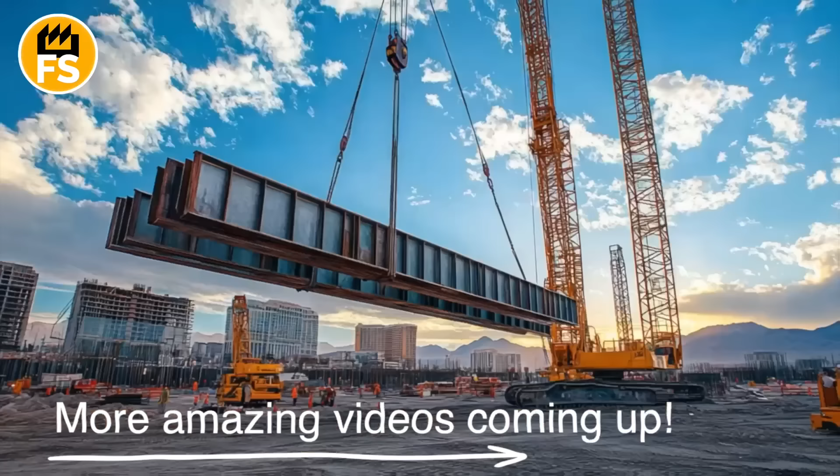Few people realize that vanadium also plays a role in long-term durability. Its compounds slow down grain growth at high temperatures and under repeated loading. This means structures made with vanadium steels age more slowly, handle cyclic loads better, and withstand sudden temperature swings. In real-world conditions, that translates to years of extra service life without repairs.

Vanadium has become a critically important metal for infrastructure, and many countries have added it to their strategic materials lists. Control over vanadium flows means control over steel quality, and therefore over construction, transportation, and defense capabilities. This factor is increasingly shaping the geopolitics of metals.

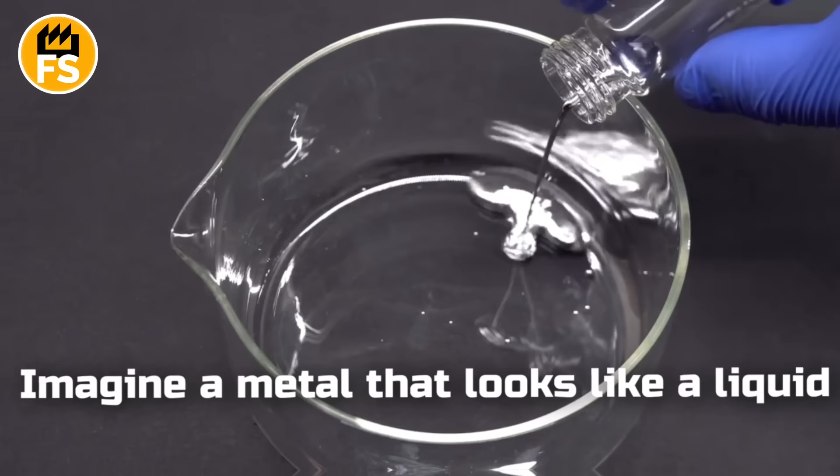Imagine a metal that looks like a liquid, moves on its own, and for centuries was thought to be the key to immortality. What if this very substance drove scientists insane, killed entire cities, and still hides underground today, waiting for human error? Every year, the world produces and isolates thousands of tons of this stuff. But the real danger isn't in the numbers. It's that mercury never disappears. It migrates, it accumulates, it comes back.

From alchemists who breathed in its vapors to tragedies born from normal water and fish, this is the story of a metal humanity called poison way too late. Stick around till the end, and you'll learn why even today, mercury isn't seen as a resource. It's a threat you can't just bury.

In ancient civilizations, people knew about mercury long before they understood how dangerous it was. They found it in nature as cinnabar, a bright red mineral that released mercury when heated. Chinese alchemists thought it was an ingredient for immortality. Egyptians used it in rituals. Romans put it in mirrors and cosmetics. Spoiler, none of this ended well. But back then, nobody was reading safety labels.

In medieval times, mercury became the star of alchemy. It symbolized change and transformation because it could be both metal and liquid at the same time. Alchemists believed it was the key to making gold. They breathed its vapors, touched it with bare hands, mixed it with other substances, and genuinely wondered why their hands were shaking, their memory was failing, and weird psychological symptoms were kicking in. That's how the mad scientist trope was born. No memes required, just real consequences.

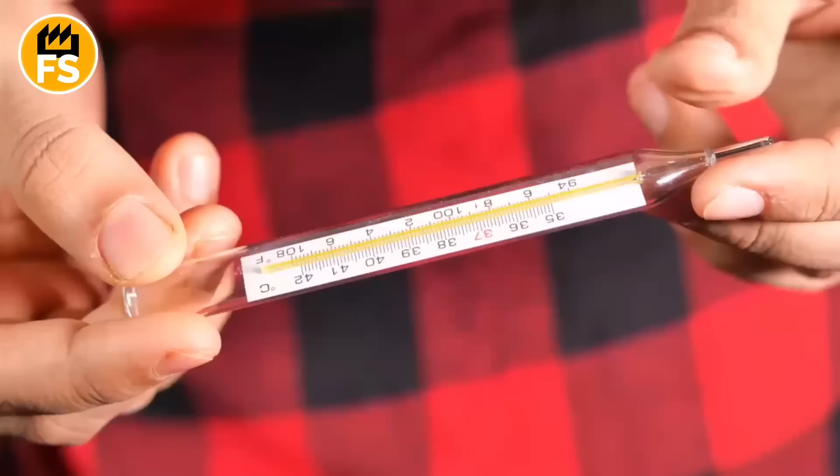It was in the 20th century that humanity started to collectively realize mercury wasn't just weird, it was genuinely dangerous. It's toxic in any form, but especially sneaky because it evaporates easily and builds up in your body. Nervous system damage, coordination problems, memory loss, vision issues. This isn't some thriller script, it's what chronic mercury exposure actually does.

The phrase 'mad as a hatter' didn't come out of nowhere. Hat makers used mercury compounds, and craftsmen literally lost their minds. Then there's the dark chapter of ecology. Mercury doesn't disappear, it migrates. When it hits water, it transforms into methylmercury and enters the food chain. Fish eaten by humans, and suddenly the toxins inside you.

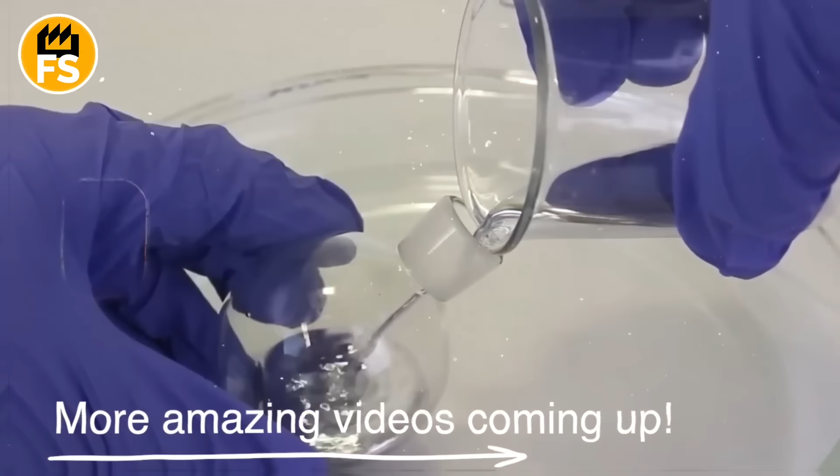The tragedy of the Japanese city of Minamata became the symbol of this problem. Mass poisoning affecting thousands of people proved that a little mercury is a myth. In the mid-20th century, in the Japanese coastal city of Minamata, a chemical plant spent years dumping wastewater loaded with mercury compounds into the bay. The water looked normal. Fish were biting.

Life went on, until people started getting mysteriously sick. First came the seizures, tremors, loss of coordination, speech problems. Then, paralysis, blindness, death. Mercury hit children especially hard. Infants were born with severe nervous system damage, even though their mothers often showed no obvious symptoms. The culprit was methylmercury, accumulating in fish and shellfish, the foundation of the local diet.

The toxin didn't disappear or dilute. It intensified at every level of the food chain. For decades, the company and authorities denied responsibility, while victims fought not just disease, but indifference. Minamata showed the world a simple, brutal truth. Even minimal doses of mercury can have catastrophic consequences when they become part of the environment. It was the end of the illusion of safe mercury.

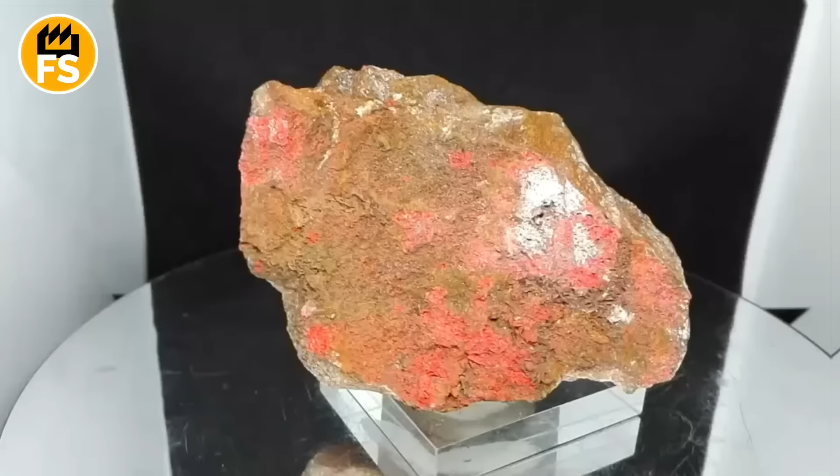Mercury deposits exist today, but attitudes toward them are radically different from centuries past. The primary natural source of mercury remains cinnabar, a bright red mineral, mercury sulfide, which forms in hydrothermal deposits, often near volcanic zones, and fractures in the Earth's crust. It's from cinnabar that metallic mercury was historically obtained through roasting, and this process has remained virtually unchanged technologically. What changed were the scale and the regulations.

The largest known mercury deposits in the 20th century were developed in Spain, Italy, China, Kyrgyzstan, Mexico, and Algeria. Spain's Almaden deposit was once considered the world's largest, and for centuries supplied a significant portion of global production. Today, it's basically mothballed, like most classic mercury mines. The reason's simple: demand tanked, and the environmental and health risks became too obvious to ignore.

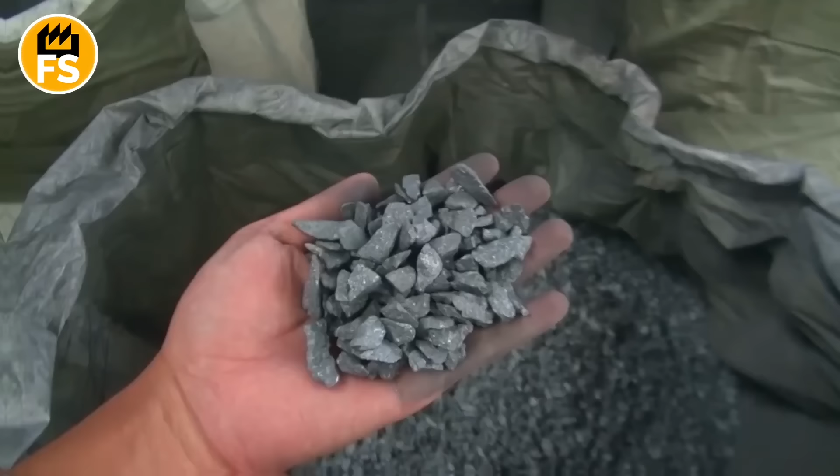China remains the main mercury producer now, but even there, extraction volumes are way lower than in the past. Many countries aren't opening new deposits. They're working with existing stockpiles or secondary mercury recovered from industrial waste recycling and dismantling old equipment. The world has essentially shifted from active mining to a mode of control and reduction.

Modern mercury deposits are increasingly viewed not as a future resource, but as a problem that needs to be safely isolated. Some deposits get shut down, others are reclassified as geological landmarks or monitoring sites. Mercury still sits deep within the planet's crust, but its story as a strategic metal is nearly over. Now it's an element humanity handles with extreme caution.

Underground mercury ore extraction in China typically starts with a narrow portal carved into rock, the entrance to a mine shaft. It might look like a dark rectangle in stone, reinforced with concrete or metal frames. Inside, a tunnel several yards wide, where small mining vehicles can pass through or conveyor belts can run. The working space is cramped and low. The ceiling's propped up with beams, the walls damp, streaked with reddish or dark brown veins of cinnabar.

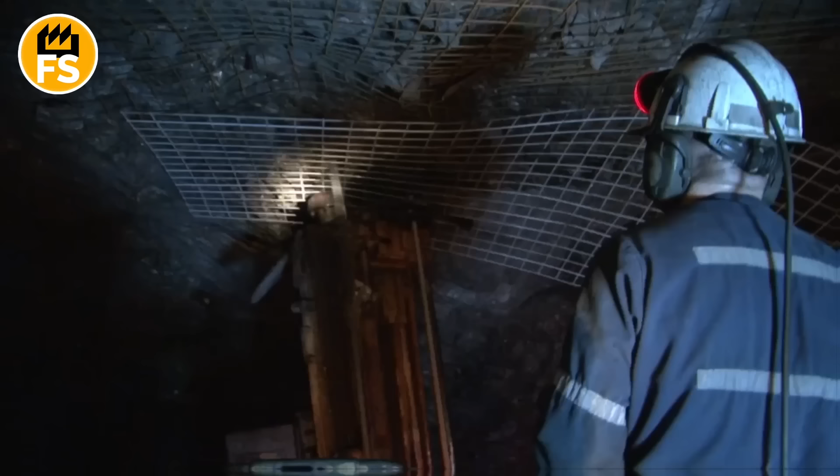Lighting: cold fluorescent lamps casting harsh shadows. The air's heavy, so ventilation is critical. Along the tunnels run air ducts, humming and pushing fresh air deep into the mine, while simultaneously pulling out dust and gases.

The ore itself is extracted using drill and blast or mechanical methods. First, drilling rigs bore a series of holes into the rock. It looks like rhythmic metal biting into stone.

Then, if blasting is used, minimal charges are placed in these holes. The explosions are controlled, small. The goal isn't to destroy everything, but to peel away the rock. After that, the tunnel fills with dust that settles for minutes, while ventilation runs at full blast.

Next, mechanization takes over. Front-end loaders rake up the broken rock, or gather it in buckets and dump it into mine cars or onto a belt conveyor. The stone looks uneven, with flecks of red. That's cinnabar, the main target.

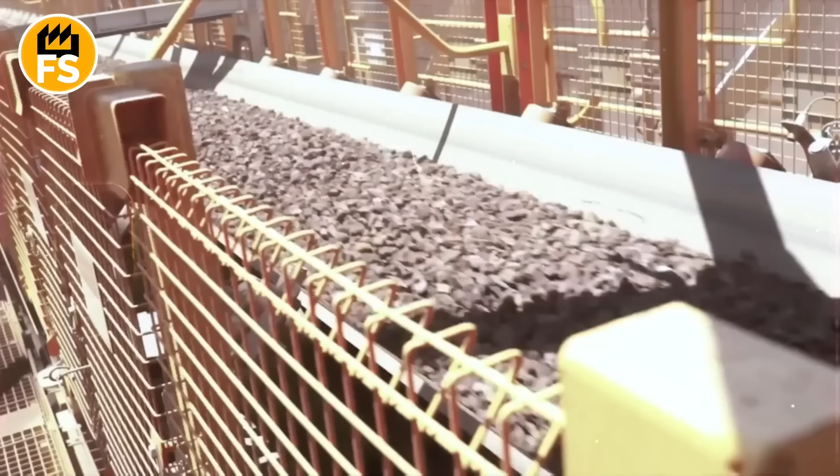People try not to touch the ore with bare hands unless they have to. The dust is dangerous, so workers wear respirators, thick coveralls, gloves. How strictly this is enforced depends heavily on the specific operation.

If it's a semi-underground or open-pit mine, the picture is different. There you'll see step-like benches cut into the rock where equipment moves around. Excavators strip away layers of ore, trucks haul it up to the surface. But even here they try to avoid huge open spaces - mercury dust and fumes are enemy number one, which is why open pits are less desirable for this kind of metal.

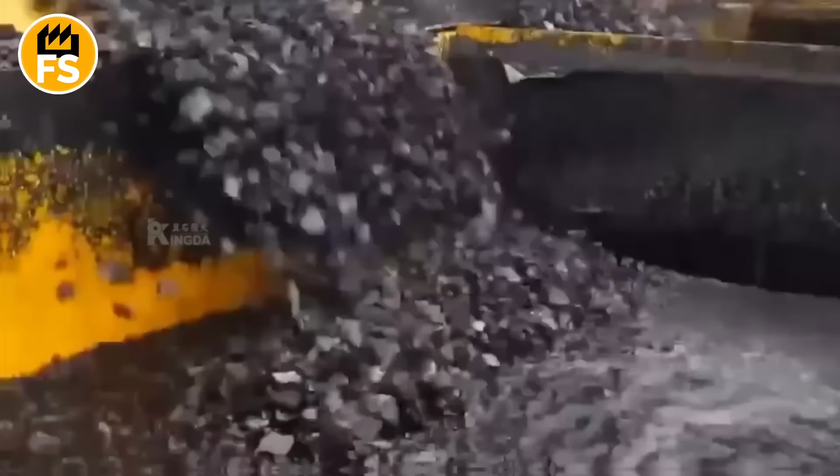All that ore doesn't sit around in the mine for long. It's immediately transported to the surface in sealed containers or on covered conveyors to minimize dust dispersal. At the mine exit, you'll often see washing stations, equipment, and sometimes the workers themselves get hosed down so they don't carry cinnabar particles beyond the production zone.

After extraction, the ore is crushed and sent for heat treatment. Cinnabar is heated in specialized furnaces, where the mercury sulfide breaks down and the metal evaporates. This stage is the most dangerous. Mercury vapors are toxic, so modern facilities are equipped with sealing, condensation, and filtration systems. The vapors are cooled, after which the mercury transitions to a liquid state and is collected in sealed containers.

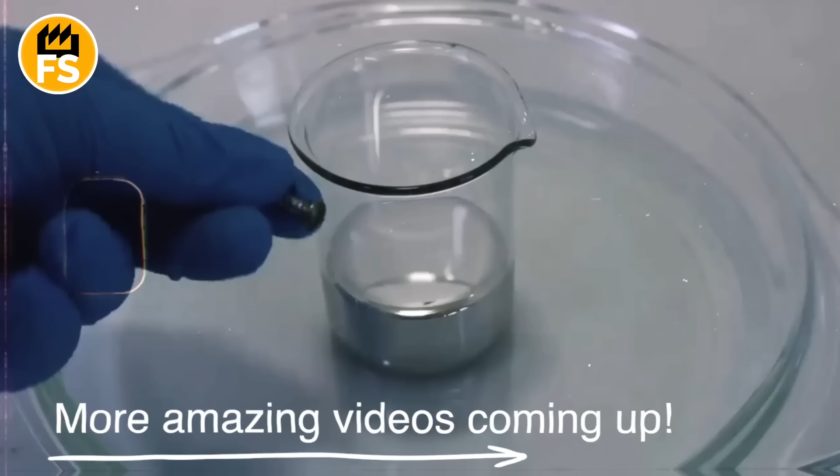Formally, all these processes are supposed to occur in a closed loop with no emissions into the environment. In practice, this is where the biggest questions arise. At large state-run or licensed operations, oversight is stricter. There's air monitoring, waste disposal protocols, and tracking of every kilogram of metal. At smaller or semi-legal operations, the risks are significantly higher, and these have historically been the source of local contamination and poisoning.

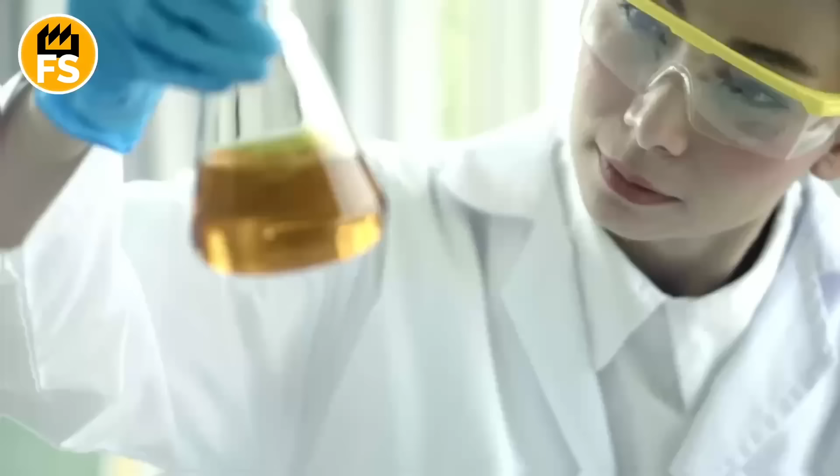Diesel fuel doesn't just appear from crude oil, like gasoline from a pump. It's the product of a long, hot, and highly controlled chain of processes, where crude oil is gradually transformed from a dark, heavy liquid into a precisely defined mixture of molecules capable of running reliably in an engine. Everything starts with oil, but then it's literally broken down into components, sorted, cleaned, and reassembled, this time in the right form.

Crude oil begins its journey far from the refinery, at oil fields, where it's lifted from the Earth's depths through wells. Along with the oil, water, gas, sand, and small rock particles come to the surface. So right at the extraction site, it's partially settled and the largest impurities are separated out.

Once it's out of the ground, the oil hits the road. Most of the time, that means pipelines, continuously pumping millions of tons of liquid across hundreds, even thousands of miles. Where there are no pipes, tankers or rail cars take over. Either way, by the time the oil reaches the refinery, it's still far from ready.

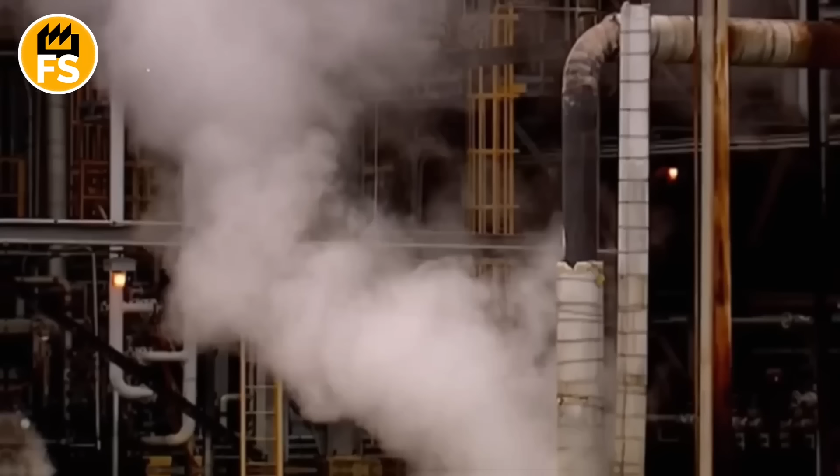Before processing can begin, the crude has to be prepped. It almost always contains water, dissolved salts, and solid particles. Leave those in, and they'll wreck the equipment fast. Salts cause corrosion, water messes with stable heating, and solids wear down pumps and pipes.

So the oil gets heated and run through desalting and dehydration units. There, it's mixed with fresh water to wash out the salts, then an electric field forces the water to separate and settle. After that, the crude is much cleaner, and a lot safer for what comes next.

The prepared crude oil enters the refinery's main unit, the atmospheric distillation column. This is a tall metal tower, like a multi-story building, with dozens of horizontal trays or packing material inside.

The column maintains a constant temperature difference. It's super hot at the bottom, and the higher you go, the cooler it gets. The oil is first heated intensely in furnaces, usually to around 660 degrees Fahrenheit, and then injected into the middle of the column in this hot state.

Once inside, the oil starts behaving completely differently than it did in the pipeline. It partially vaporizes, creating a mixture of vapor and liquid. Lighter components with lower boiling points quickly turn to vapor and rise upward. Heavier fractions stay lower or flow all the way down to the bottom.

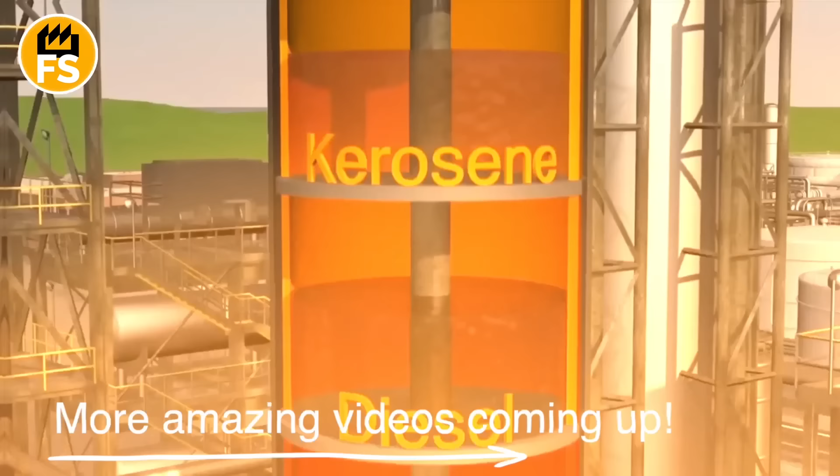Everything happens without chemical reactions. The molecules don't break down or change, they simply separate based on physical properties. It's from this point that the real life of crude oil begins as raw material for fuel, lubricants, and dozens of other products, because each fraction obtained will follow its own technological pathway.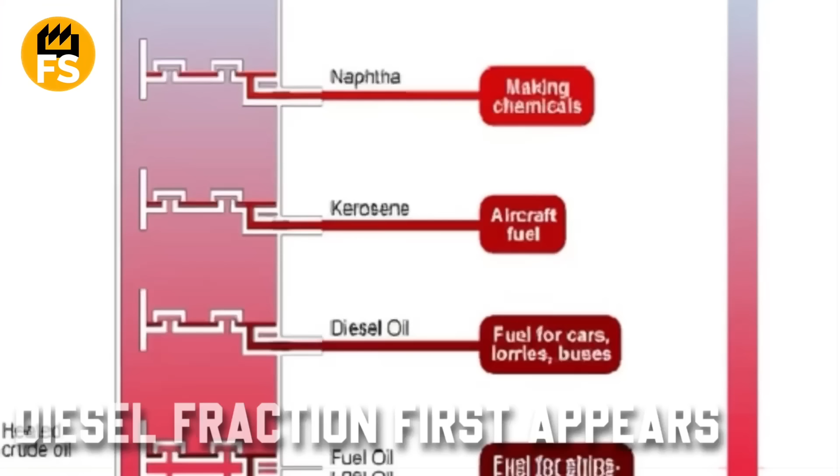This is where diesel fraction first appears. It's heavier than gasoline and kerosene, so it condenses lower down, but it's still light enough to be a liquid fuel.

This isn't finished diesel fuel yet, just a halfway point, gas oil. It packs a lot of useful energy, but also plenty of sulfur, nitrogen compounds, and unstable molecules that engines hate.

The gas oil that comes out of crude distillation is still miles away from the diesel fuel you pump into your tank. It looks similar, sure, but its makeup is dirty by modern standards. It contains sulfur, nitrogen compounds, traces of metals, and unstable hydrocarbon chains that oxidize easily and form carbon deposits.

If you fed this stuff straight into an engine, it would quickly destroy the injectors, catalytic converters, and exhaust cleaning systems. That's exactly why gas oil has to go through a hydro-treating stage.

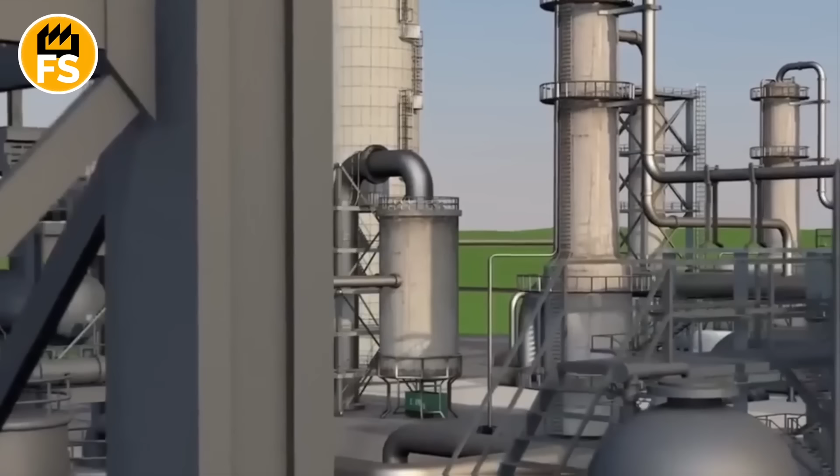At this stage, the fuel gets channeled into special reactors where they create extremely harsh conditions. Temperature there typically hits several hundred degrees, and pressure runs dozens of times higher than atmospheric. Hydrogen gets fed into the gas oil, and this mixture passes through a catalyst bed.

The catalyst doesn't get consumed in the process, but it's what forces the chemical reactions to go fast and in the right direction. Without it, purification would either be way too slow or just flat out impossible on an industrial scale. When the gas oil contacts the hydrogen, a series of reactions kicks off.

Sulfur-containing compounds break down, and the sulfur converts into hydrogen sulfide, a gas that's easy to separate from the fuel. Nitrogen compounds transform into ammonia, which also gets removed from the stream.

At the same time, hydrogen heals unstable molecules. Double bonds get saturated, and fragile structures rearrange into more stable ones. As a result, the fuel becomes chemically calmer, oxidizes less during storage, and behaves better during combustion.

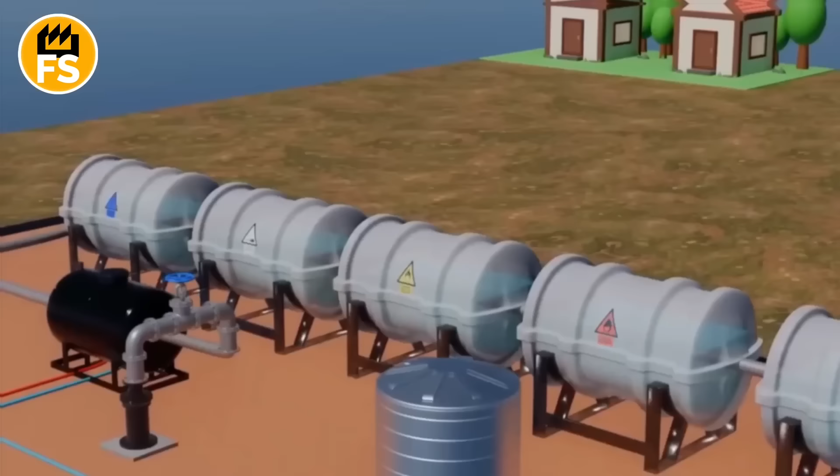After the reactor, the gas oil is cooled and sent to separation units. There, gaseous products, hydrogen sulfide, ammonia, excess hydrogen, are separated from the liquid fuel. Hydrogen is usually recycled back into the process, while harmful gases are sent for further processing or neutralization.

It's thanks to this stage that sulfur content in diesel fuel drops by tens or even hundreds of times, down to levels that meet modern environmental standards.

The importance of hydrotreatment can't be overstated. It doesn't just cut harmful emissions, it directly impacts engine life. Cleaner fuel puts less wear on fuel injection systems, doesn't poison catalytic converters and particulate filters, burns more consistently, and keeps the engine running predictably.

This is really the stage where gas oil stops being a semi-raw material and starts becoming actual diesel fuel suitable for 21st century machinery. But the process doesn't end there.

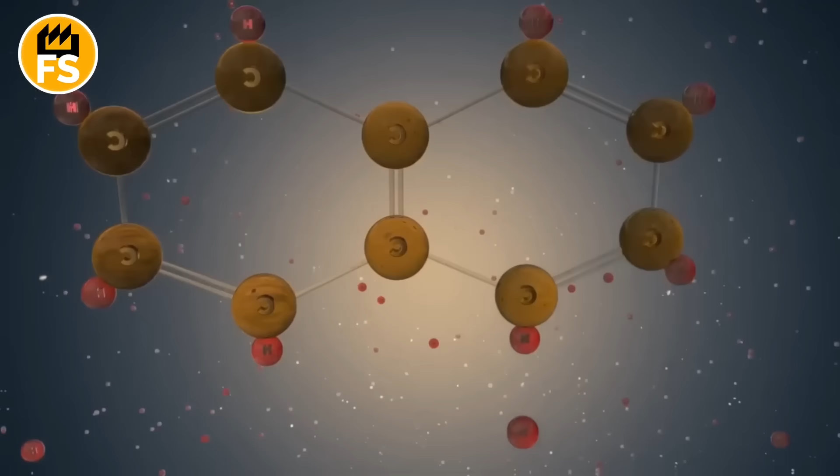Some diesel components don't even come from primary distillation. Heavy petroleum residues go through vacuum distillation, where reduced pressure extracts even more useful fractions. And if that's still not enough, cracking enters the picture, a process where large, lazy molecules are literally broken down into smaller ones.

Hydrocracking is especially critical for diesel because it produces fuel with better combustion characteristics, a higher cetane number, and fewer impurities. After all these stages, different diesel components get blended together.

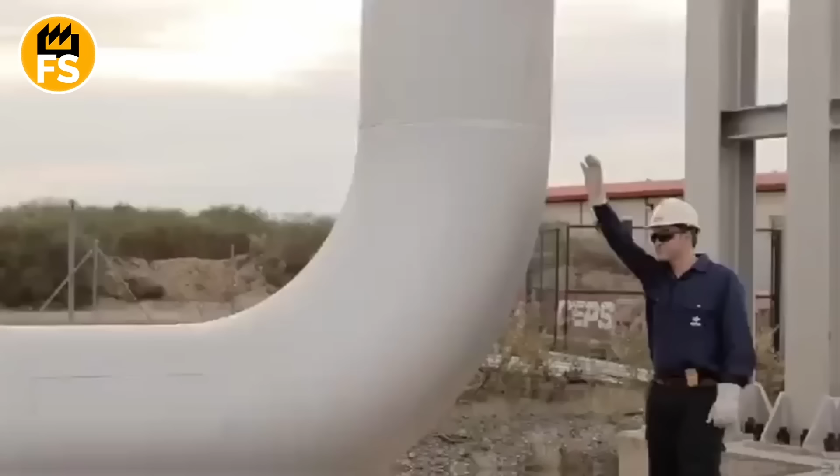This isn't some random pouring from one barrel to another. It's precise recipe-based mixing. Engineers dial in the proportions so the fuel meets standards: good ignition, no thickening in the cold, minimal smoke, and no damage to the fuel system. At this stage, they add additives, tiny amounts but with big impact. They improve lubrication properties, protect against corrosion, reduce foaming, and help the engine start up in winter.

Seasonality is a whole different story. Summer diesel is thicker and more stable in warm temperatures. Winter diesel undergoes additional processing. Components that could crystallize in the cold are removed or modified. Otherwise, at 14 degrees Fahrenheit, the fuel starts turning into a cloudy sludge that clogs the filters. For extremely cold regions, they make Arctic diesel, lighter, pricier, and way more complex to produce.

Once the fuel's ready, it's stored in tanks, then shipped to fuel depots, and finally to gas stations. But even along that route, it can still be tested, filtered, and adjusted. Diesel isn't a product where you can afford close enough. One small mistake at the refinery can turn into widespread equipment failures.

They extract it in mountains where stone is born from flames and pressure capable of crushing anything alive. Its formation takes hundreds of millions of years, and today people cut it with diamonds at a speed of 20 miles per hour. But what if I told you that this shiny material, used to decorate palaces and statues, was once the bottom of an ancient ocean? And that every slab of marble is a frozen story of life, death, and time? Watch until the end, and you will see how nature creates its own masterpiece, and people try to uncover its secret.

Marble is not just a beautiful stone for decoration or sculpture. It is a material that has millions of years of geological transformation behind it. Its journey begins deep underground, where temperature and pressure change ordinary rocks beyond recognition. The basis of most marble is limestone, a sedimentary rock formed mainly from calcite.

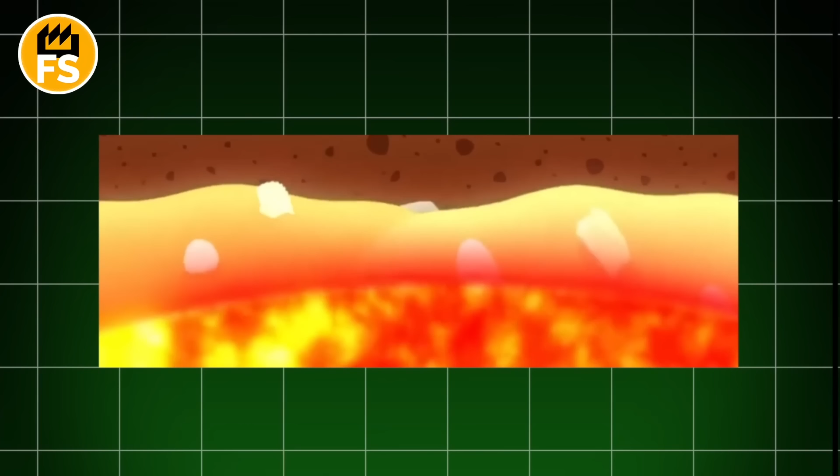Limestone is formed at the bottom of ancient seas and oceans from the remains of marine organisms, corals, mollusks, foraminifera. Over millions of years, these fragments settle, compact, and cement together under pressure to form thick layers. When such layers fall into a zone of tectonic processes, where the Earth's crust moves, compresses, or subsides, they sink into deeper layers of the Earth. There, the temperature can exceed 1,200 degrees Fahrenheit, and the pressure reaches 1,000 atmospheres.

Under these conditions, metamorphism begins, the process of transforming rocks without complete melting, but with a change in their structure. During metamorphism, the calcite crystals in the limestone begin to recrystallize. The old grains disappear, and instead new ones grow, larger, tightly fused together. This process gradually transforms the loose sedimentary rock into a solid monolith with a characteristic shine and granular texture. It is this structure that gives marble its famous ability to be polished.

The variety of colors and patterns in marble is the result of impurities that got into the limestone during its formation or metamorphism. If there is iron in the rock, the marble acquires reddish or yellow hues. Graphite or organic matter makes it gray or black. Impurities of serpentinite or chlorite add green tones. Quartz, dolomite, and pyrite create veins, the same patterns that make marble seem alive.

Marble is not formed instantly. The process can take hundreds of millions of years. In places where tectonic plates collide, for example in the Himalayas, the Alps, or the Apennine Peninsula, the rocks experience the most intense pressure. That is why such areas have become world centers for marble quarrying, for example Carrara in Italy, where white marble of extraordinary purity was formed.

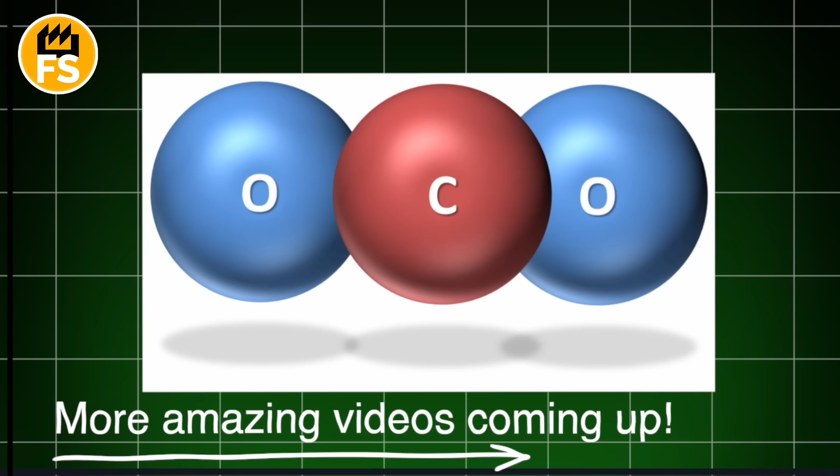During metamorphism, degassing also occurs, the release of carbon dioxide that remained in the pores of the limestone. Because of this, the structure of marble becomes almost non-porous. This density makes it durable, but also more brittle with sudden changes in temperature.

In some cases, the process of marble formation can be partially reversible. If the temperature is too high, the calcite begins to melt, forming intermediate forms between metamorphic and igneous rocks. Such transitional marbles are found in areas of contact between limestone and magmatic intrusions, for example near granite massifs.

Another interesting feature is the zonation of formation. In nature, it is rare for an entire layer of marble to have the same structure. In different areas, the pressure and temperature are different, so some layers are coarse-grained, others are fine-grained, some have veins, others have a uniform color. This explains why even within a single quarry, marble of a completely different appearance can be extracted.

When geologists study deposits, they are looking for precisely those places where the limestone has undergone complete metamorphism, but has not been destroyed by excess heat or deformation. Sometimes these layers lie at a depth of several hundred feet. Sometimes they come right to the surface, as in Tuscany or Greece.

The quarrying and processing of marble is no less fascinating a process than its formation. The modern marble industry combines powerful machinery, precise laser technologies, and artisanal craftsmanship that has barely changed since the time of Michelangelo. The first stage is the identification of the deposit.

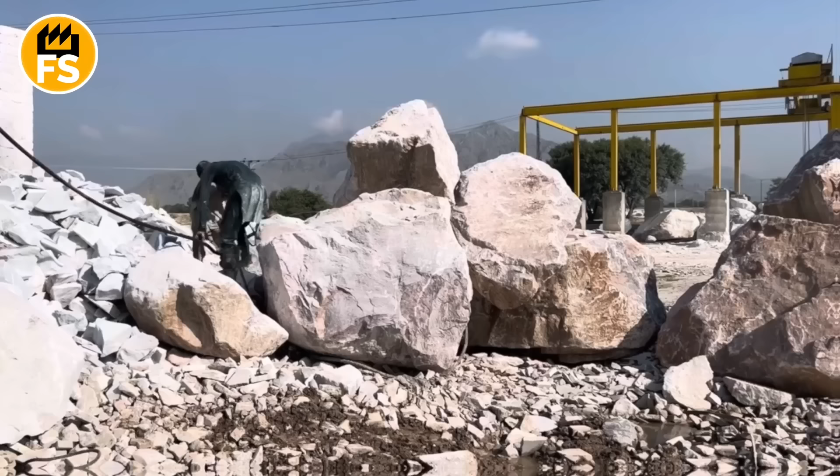Geologists conduct research on mountain ranges using georadar, laser scanning, and drilling samples. The goal is to find a layer of marble of the required thickness, color, and uniformity. Sometimes the required layer lies almost on the surface, as in Carrara in Italy, or on the island of Paros in Greece. In other cases, it has to be uncovered, removing tens of feet of rock from above.

When the site is prepared, the separation of marble blocks begins. Once, this was done with explosives, but now much more precise and safer methods are used. The main tool is diamond wire saws.

This is a steel cable on which hundreds of diamond segments are strung. The cable is stretched between two pulleys and rotates at a speed of over 20 miles per hour, gradually cutting the stone like a string cuts cheese. Thanks to a water cooling system, the cut is even and smooth, without cracks.

Another method is drilling vertical and horizontal holes in the rock, through which a diamond wire is then threaded. This forms the rectangular contour of the block. When the cuts are connected, a huge piece of marble, usually weighing from 20 to 50 tons, is separated from the mountain massif. It is propped up with hydraulic jacks. Steel wedges are inserted, and the block is gradually released, preventing a sudden fall.

Next, the blocks are transported from the quarry to processing plants. On the slopes of mountains, powerful tracked loaders and platforms on heavy trailers are often used for this. In mountainous areas where there are no roads, marble is sometimes lowered by special cable systems, a kind of funicular that leads from the quarry to the valley.

In the workshops, the blocks are cut into slabs or blanks. For this, gang saws are used, large frame machines with dozens of steel blades, between which an abrasive mixture with water is fed. In modern production, they have been replaced by diamond circular saws or laser cutting machines. The cutting accuracy reaches fractions of a millimeter.

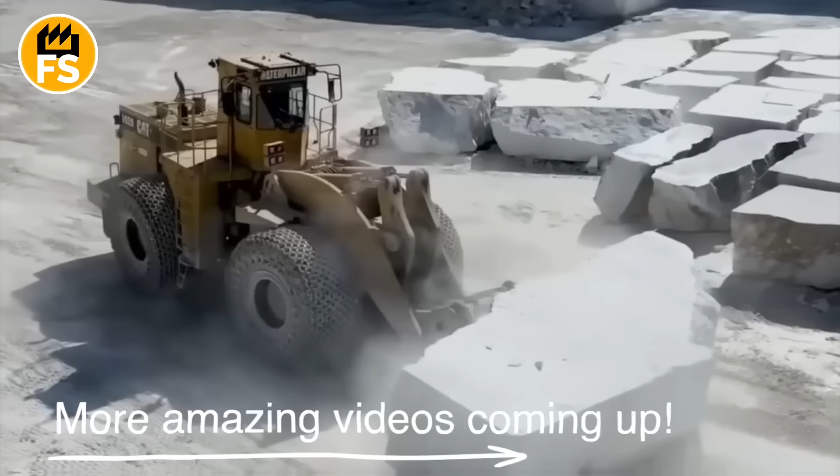After cutting, the surface of the slabs is ground with abrasive stones of different grits, gradually moving from rough grinding to mirror polishing.

If the marble is intended for architectural projects, it is further strengthened. A thin layer of resin or fiberglass is applied to the backside. This prevents chipping during transportation and installation. For sculptures, such reinforcement is not done. On the contrary, they look for a stone with a uniform texture without microcracks.

Polishing is a separate art. It is performed on large machines where a series of round abrasive discs pass over the surface, gradually giving it a deep shine. To achieve a perfect effect, powders of tin or cerium oxide are used. It is they who reveal the structure of calcite, and the marble begins to play with reflected light.

After polishing, the marble slabs are marked and sorted by color, pattern, and quality. Part of it is sent for export, another part to workshops for carving, facing, or manufacturing architectural details.

Sculptors work with marble much more delicately. They use hand chisels, hammers, and now, pneumatic tools that allow them to carefully remove the stone layer by layer. Even with modern technologies, the art of marble processing remains semi-artisanal. It requires an eye, a touch, and an understanding of how the rock behaves.

At the end, the marble products are coated with protective waxes or silicone impregnations, which enhance the shine and protect the surface from moisture. For interior work, softer compositions are used. For facades, water-repellent, UV-resistant ones.

Quarries are usually located in mountainous areas that are difficult to reach. To cut blocks weighing from 20 to 50 tons, expensive equipment is needed: diamond wires, cranes, hydraulic jacks. At the same time, about 30 or 40% of the quarried stone is suitable for commercial use. The rest is cracked or defective blocks that go to waste or are crushed into crumb.

Due to the mass and fragility of the slabs, they are transported on special trailers or containers with cushioning. For imported marble, delivery can account for up to 30% of the final price.